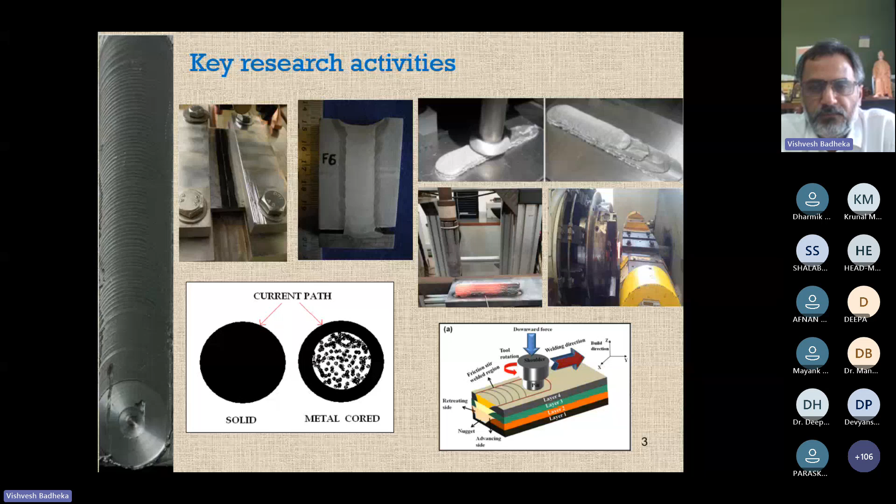This is a general slide which talks about some of the key ongoing research activities of our group. As far as today's presentation is concerned, this content has been planned for one hour, for session 1, and there is some other content planned for another session.

The classification of welding processes, challenges of dissimilar metal joining, friction welding, friction stir welding technology - wherein you have two different parts: welding and processing. Today's focus is on welding; the second session focuses on processing. I will be talking mainly about friction stir welding for dissimilar metals and materials, and friction stir welding variants.

Under the variants, assisted FSW, twin stir FSW, bobbin tool FSW, dual rotation technique, then another important process called friction stir spot welding, refill friction stir spot welding, pinless, double-sided, and finally friction stir scribe welding and stationary shoulder FSW. The whole focus in this first module is on the welding side.

So to begin with, I would like to start with the classification of welding processes. The classification includes solid state welding processes and fusion welding processes. When you say fusion welding process, there is a typical metallurgical phenomenon which happens, similar to the casting operation - melting and solidification.

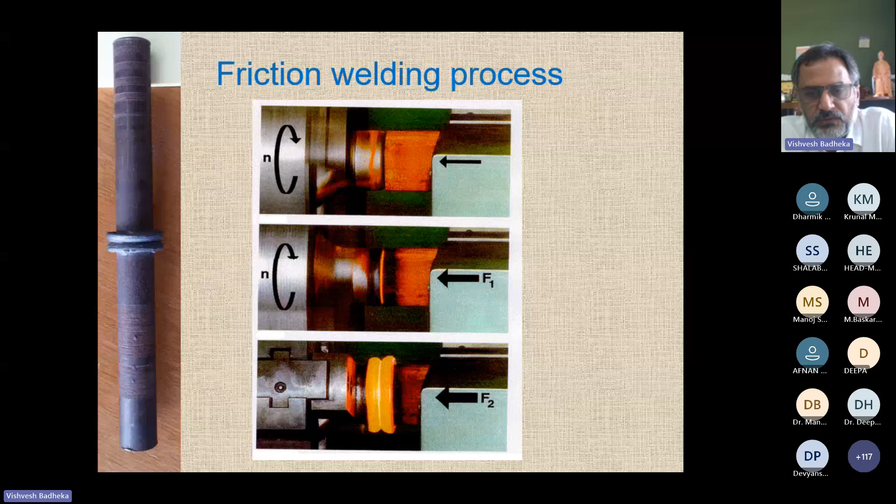So I have a small video clip here, which may help you understand. Now you see, this is the process. Can you please confirm whether the video is running properly? Yes sir, yes sir, yes sir. Okay fine.

Now you see, there is a video of rotary friction welding going on here, and this is what the friction welding process looks like. You can see the ring formation, and there are many combinations. As mentioned, one component has to be rotating and circular. You can also go for dissimilar geometry - you see the material is the same, but the geometries are different. The conventional one, with circular geometry, you can do easily on a lathe machine. This is friction welding.

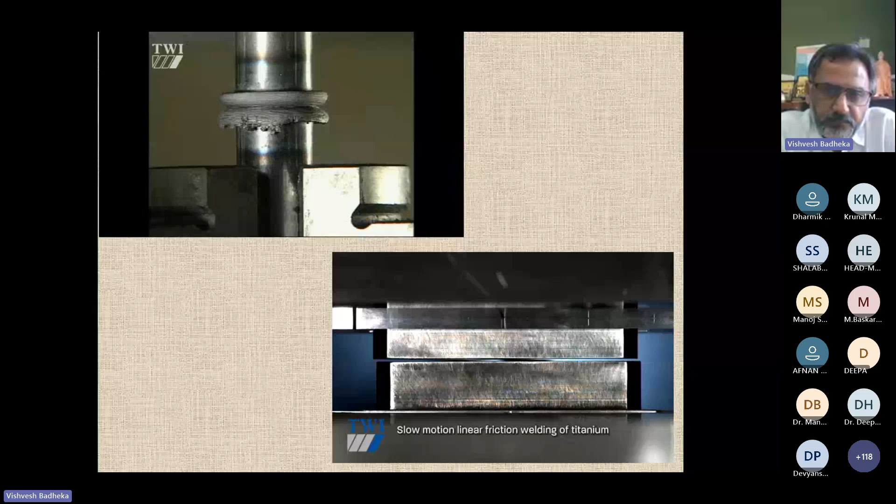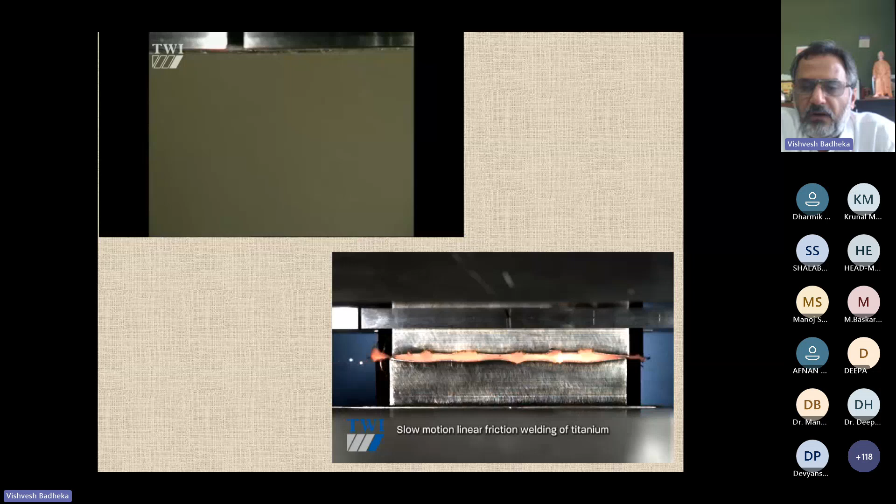So now here also, there is another possibility. You see there is a linear motion going on between the two interfaces. This linear motion may help develop red spots at certain intervals, and you can reduce the frequency further. These interfaces are rubbing against each other with a certain downward force. With the passage of time, these red spots get bigger and bigger, and eventually the complete interface becomes red hot. Now you see, this is how slow motion linear friction welding happens. So there are researchers working in this particular domain also - linear friction welding.

So rotary friction welding and linear friction welding - as I mentioned, friction welding is the mother process from where the other processes were invented. This is background, because our intention is to talk more about welding. Now, our actual presentation starts from here.

Now you see, if you look at friction stir welding technology, it has been divided into two parts: a welding part and a processing part. Our first session focuses more on the welding technology, friction stir welding technology, followed by the processing part. One of the speakers has already given a very detailed session on friction stir welding, so I'm not going to repeat that. Based on that, we are going to build on what other variants exist in friction stir welding technology, and in the second session our focus will be on the processing side.

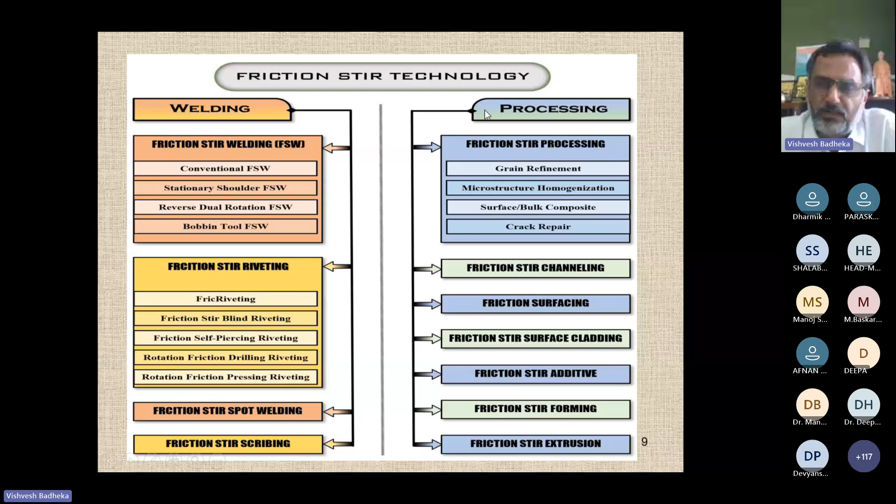So the main heart of friction stir welding lies with the tool. The friction stir welding tool is non-consumable, and there are two major elements: one is the pin and another is the shoulder. The pin is responsible mainly for material flow, while the shoulder is responsible for generating the heat. The shoulder generates around 80% of the heat, while the pin generates around 20%, because the pin's main function is to mix the material at the interface.

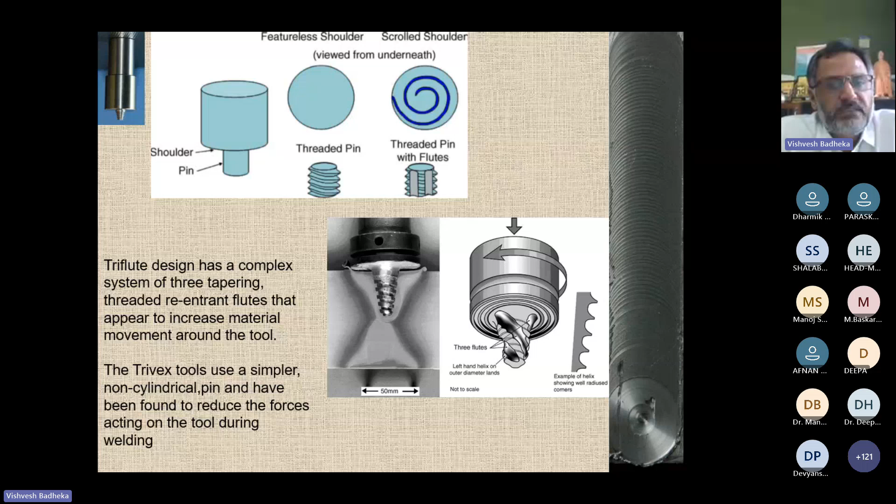His name is Dr. Wayne Thomas. He is the one working with TWI. TWI is the Welding Institute, located in the UK. I had the opportunity to attend the 11th FSW conference in Cambridge, where I had the chance to interact with Mr. Wayne Thomas, the one who invented friction stir welding technology.

Now, to begin with, our focus is on friction stir welding of dissimilar metals and materials. To start with, the first part of friction stir welding is dissimilar metal joining. When you say dissimilar metal or material joining, you are already familiar with the conventional parameters important in friction stir welding and processing.

RPM is important, welding speed is important, tool tilt angle is important, downward force is important. At the same time, there are two other parameters which are very important when you talk about friction stir welding of dissimilar metals - one of which is called the positioning of the material.

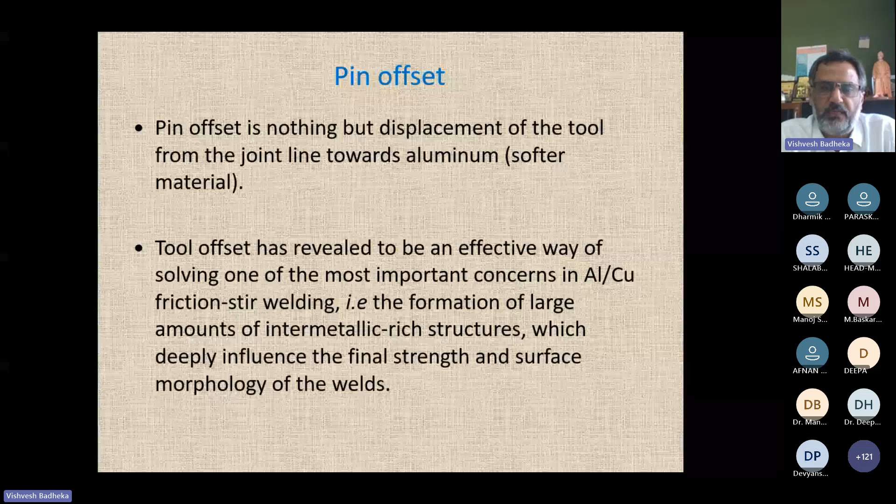It's very simple mathematics. Say for example my pin diameter is 6 millimeters, so half of the pin diameter is 3 millimeters. My maximum offset cannot be more than 3 millimeters. If I start with 3 millimeters, contact with the hard material will be minimum. Then from 3 millimeters, I can move to 2.5, then 2, then 1.5, 1 - that's how my contact with the hard material will go on.

That's how you can play with different offsets and optimize the strength and ductility of the joint. This is a very important parameter when you go for dissimilar metal joints in friction stir welding.

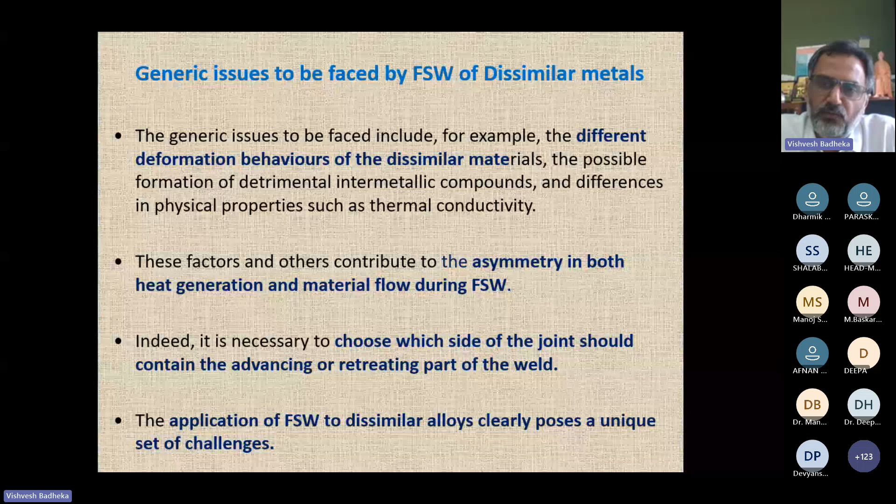So what are the general issues faced by friction stir welding of dissimilar metals? I already mentioned the challenges when you go for dissimilar metals through fusion welding, so there are challenges here also. What are those challenges? You have different materials with different mechanical properties, different thermal behavior, different heat generation and material flow. Which material will go on advancing side, which material will go on retreating side, how you will optimize the tool pin offset - these are the set of challenges when you go for friction stir welding of dissimilar metals. Hope this concept is clear to all of you.

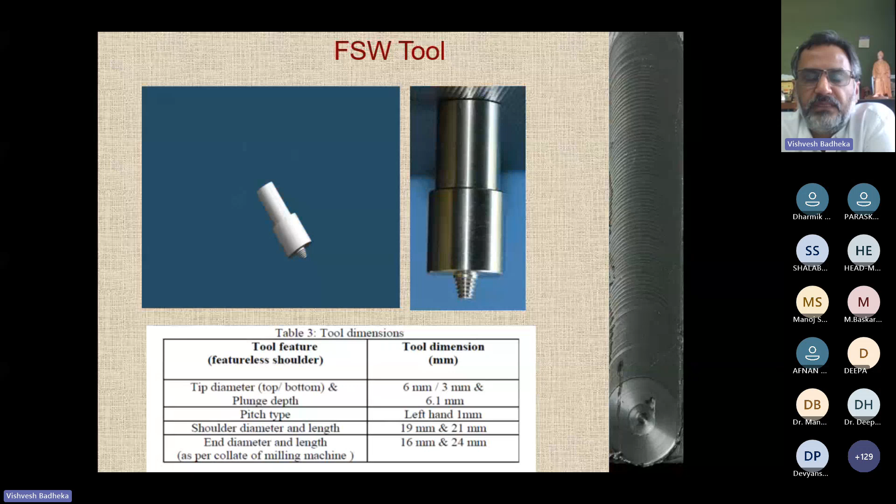So just to mention here, for any friction stir welding application, you require a tool. As I mentioned, the tool is the heart of the friction stir welding process. It is a non-consumable tool and it follows certain design criteria - the length, the diameter, the thread, the shoulder diameter, and the holding part. So it follows certain dimensional criteria.

We worked with ISRO on a RESPOND project for friction stir welding technology development for 1 millimeter, 3 millimeter, 6 millimeter, and 12 millimeter. So we developed various tooling, various process windows, and then their mechanical and metallurgical properties. And we transferred this development to the Space Applications Centre.

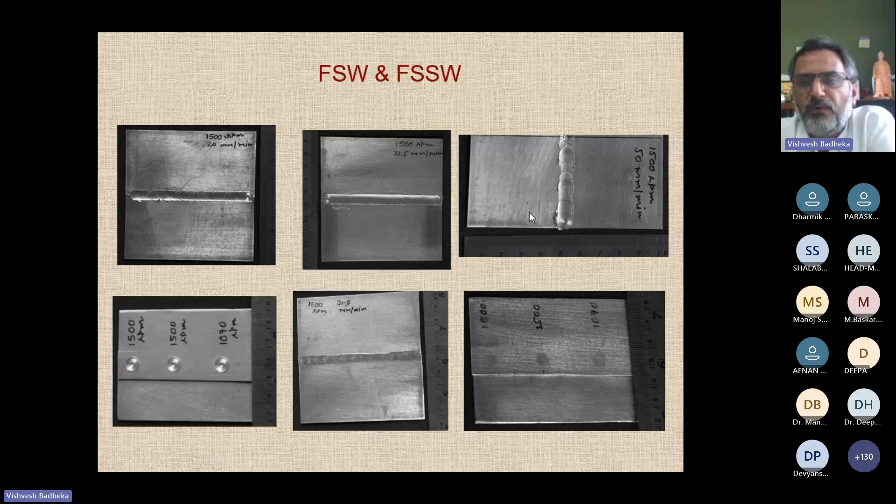You can see here some pictures of that. I'm not presenting everything, but just to show you that we are able to weld even 1 millimeter sheet. You can see this is a 1 millimeter sheet which has been welded on a vertical milling machine.

And you can do friction stir spot welding also. We will be discussing that part also subsequently.

So after giving you the background of friction stir welding for dissimilar metal, the next topic in this presentation is assisted friction stir welding. Now you may have a question why there is a need for having an assisted heating in friction stir welding. So before I explain, I would like to explain this process first.

So let us understand that you are doing a friction stir welding, and ahead of the friction stir welding there is a laser beam. Now assisted heating can be done with any variety of heat source. You can use even arc also, I mean gas tungsten arc welding torch. You can use even plasma also because they are non-consumable, I mean they have a non-consumable electrode. At the same time, you can use TIG, plasma, laser, or even oxy-fuel gas welding flame also.

So there are various heating elements. You can even go with induction heating also, ultrasonic assisted heating also. So there are various possibilities.

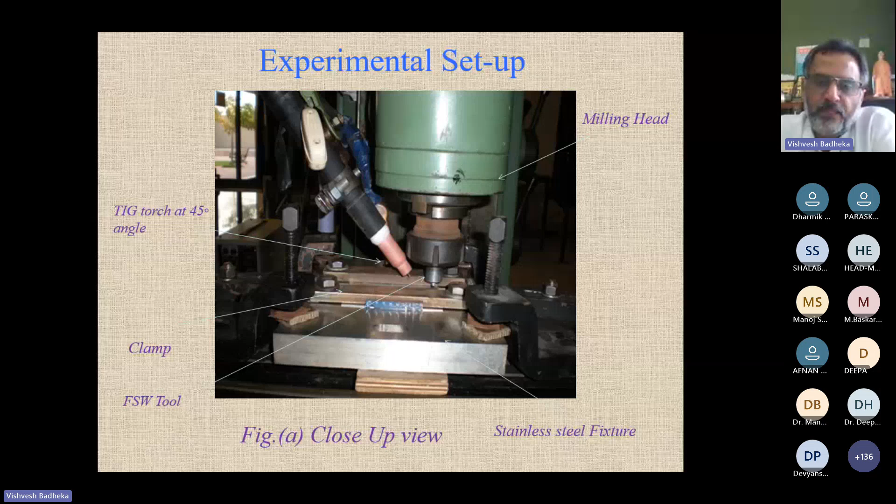This is the complete setup wherein you have a vertical milling machine clubbed with the gas tungsten arc welding torch, because shielding gas is also required. Experiments were performed with assisted heating mode using GTAW, because tungsten is a non-consumable electrode and the arc does not interfere with the FSW process.

So these are in-house results. Even if you don't apply assisted heating for high temperature material, applying assisted heating mode in soft material will still benefit you in terms of higher welding speed.

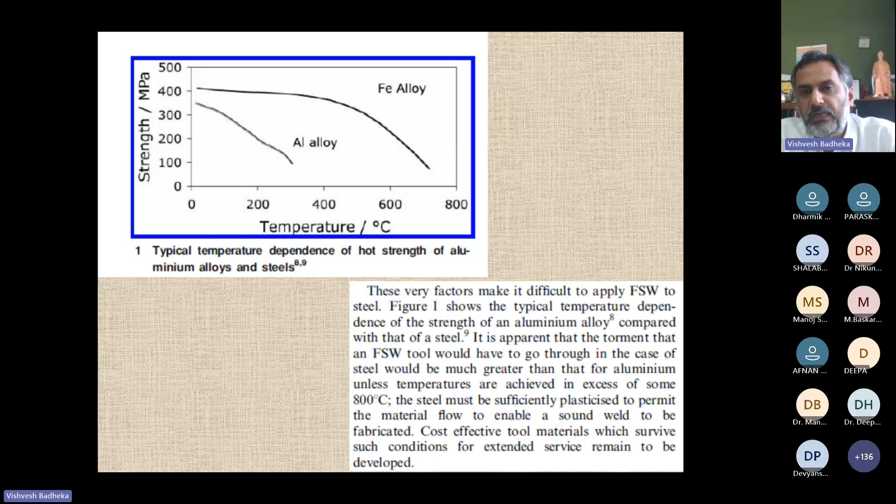So that was about assisted heating mode in friction stir welding. Heating plays a very, very important role, and you have to understand this particular slide very clearly. This gives you more clarity on why friction stir welding of other materials is challenging.

Moving further into another variant of friction stir welding, called twin stir friction stir welding. This twin stir is similar to how in arc welding we use two different arcs, a tandem kind of arrangement, with two arcs, one following the other or side by side, for different joint configurations.

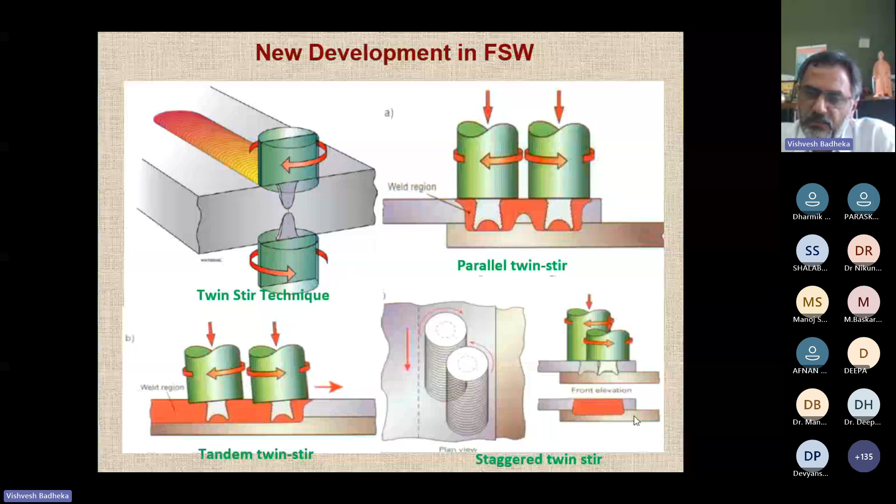A lot of interest has been there in parallel twin stir technology also. When you look at research articles, you realize limited articles are available in the area of twin stir technique. You can see the cross section wherein earlier you were getting an unfused area, but now with this staggered one, that is avoided. So these are the few twin stir technologies.

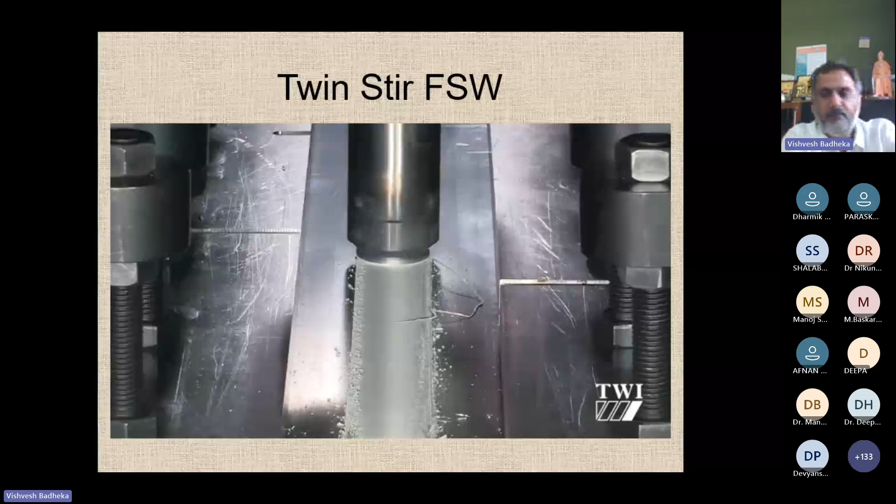Here is a twin stir technology clip. You can see two tools, one at the top, another at the bottom. As I mentioned, in twin stir there are many possibilities, and this is one of them. This is the back side, from the bottom side, because you have two tools, one at the top and one at the bottom. This is the bottom side, and this is the top side.

This is called twin stir, used when you want to go with higher section thickness, or when you want to weld a wider area. This is one type of twin stir. Going back, what you saw in the video is this. Similarly, you can have parallel twin stir, staggered, and tandem as well. With one spindle, you can rotate two tools. You have one spindle, and with that spindle you have one conventional tool which, through a gear attachment, is connected to another tool. So one spindle helps rotate two tools.

Going further, there is another possibility in friction stir welding called bobbin tool friction stir welding. In conventional friction stir welding, you are all familiar now, you have one pin and one shoulder. But here you have two shoulders. You can see here, one pin and one shoulder normally, but here you have two shoulders. Now, what is the benefit of the second shoulder?

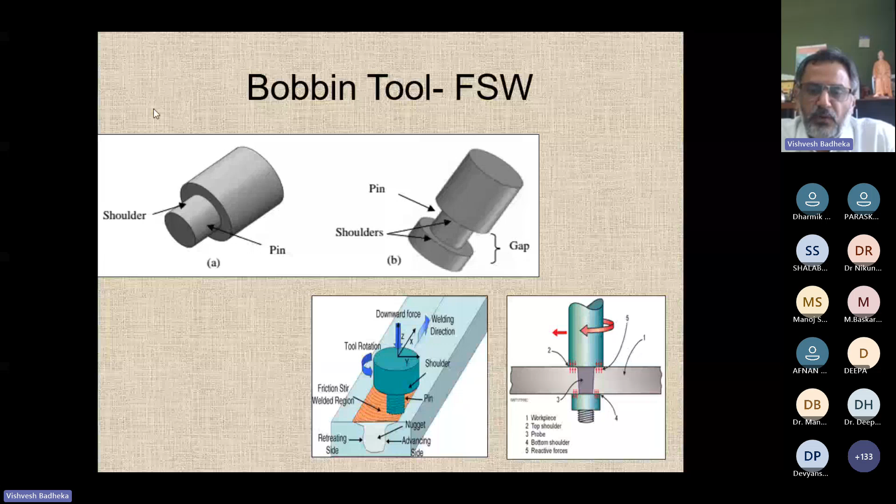So here also, similarly, if your plate thickness is 6 millimeter, the pin length will be 5.8 or 5.9, so that sufficient friction is generated between the surfaces, and then you're able to weld. This solves the problem of the backing requirement.

That's how it is called bobbin tool friction stir welding. Your fixture is also different. This is your conventional fixture for friction stir welding, and this is your bobbin tool fixture, wherein half of the plate will be on this side, another half from this side, and the tool will penetrate from this area. Because the tool has a second shoulder, it cannot penetrate from the top side, it has to penetrate from the side.

So you can see one more picture here. This is how conventional FSW works, and this is how bobbin tool friction stir welding works. It will penetrate from the side. You see the second shoulder here. Now the second shoulder is the one acting as a backing plate.

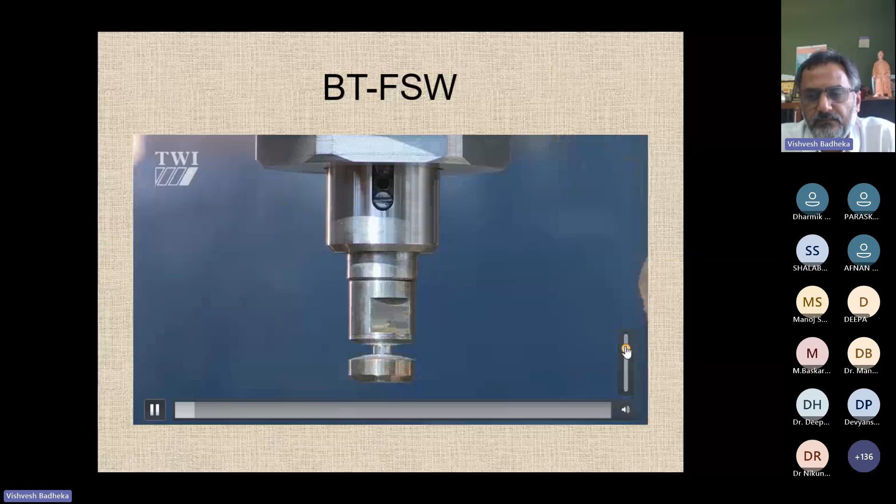Now here also I have a small clip which may help you understand bobbin tool welding easily. This is called floating. Floating means it will adjust during the process. You can see here there is a curvature surface, right? Since it is adjustable, it is called so. There are two types of bobbin tool: fixed one and floating one. This is the floating one, so it will adjust during the process.

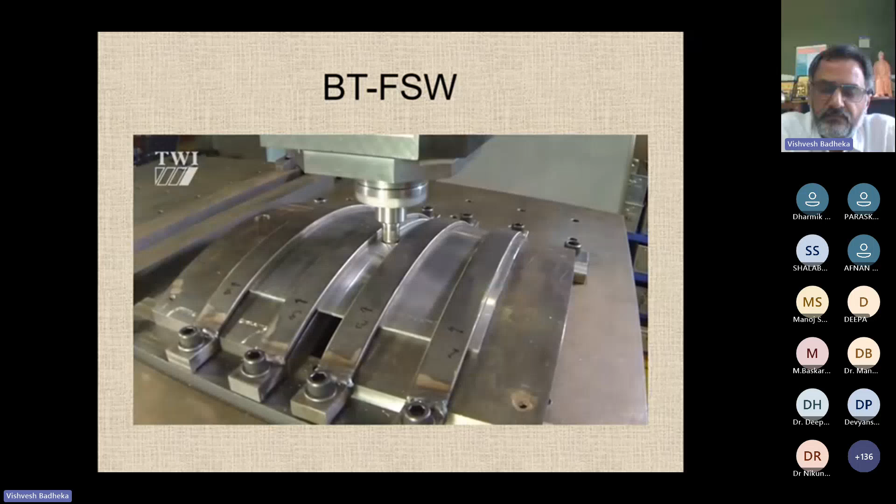Now you see this bobbin tool, the second shoulder, it is penetrating from the side, not from the top. So once it penetrates, in normal FSW you get a keyhole at the end, but here you get a little bit of a slot. You see here, there is a small slot formed, because you cannot exit the way you exit in FSW.

So this is called bobbin tool friction stir welding. Probably one more clip is there to make you more clear about the bobbin tool, on floating bobbin tool friction stir welding, you see here, that was on a curvature surface.

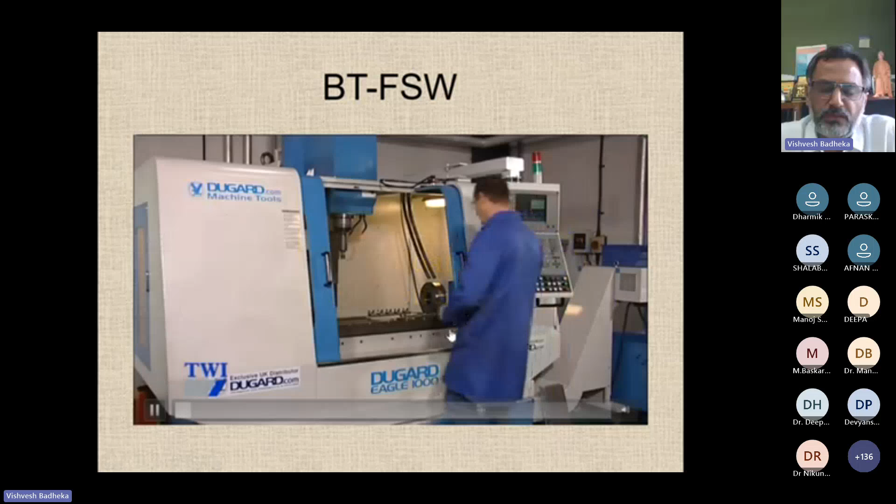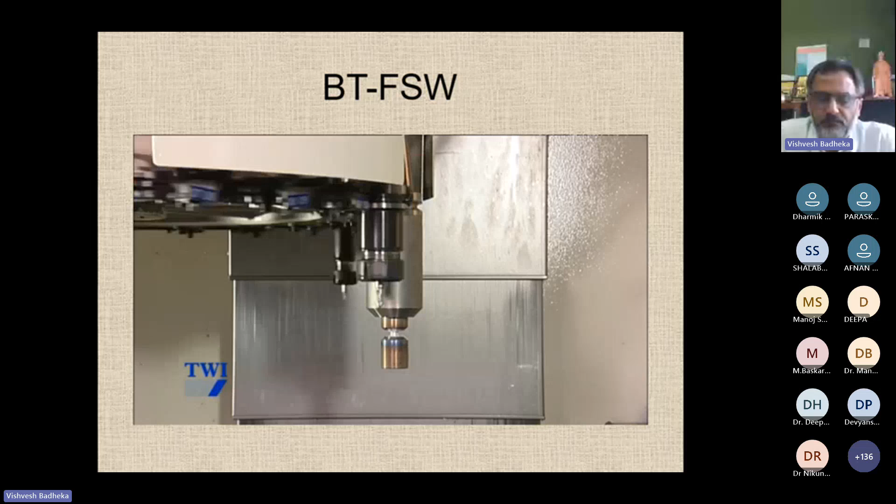Welding using zero downforce has been successfully demonstrated at TWI, simply with a traditional milling machine. The technique uses a floating bobbin-shaped tool. Successful demonstrations have shown that FSW can be performed using traditional, unmodified machine tools. A milling machine like this is all you need. The technique is ideal for joining low-temperature softening materials such as aluminium. Here, grade 6082 aluminium is being joined. The bobbin tool penetrates the joint line either directly or, as in this case, from a milled recess in the material's edge.

The process lends itself to joining closed sections, where conventional use of a well-supported backing bar is either difficult or impossible. Since, by definition, the bobbin creates a full penetration weld, the potential for creating kissing bonds, usually associated with lack of tool penetration, is eliminated. The process uses a one-piece tool, unlike some FSW variants, which require complex multi-piece tooling. As the machine bed is traversed, the material passes between the shoulders of the bobbin. So the process involves zero vertical force, unlike earlier adaptations of the friction stir welding process. No backing bar is required because the bottom shoulder supports the underside of the weld.

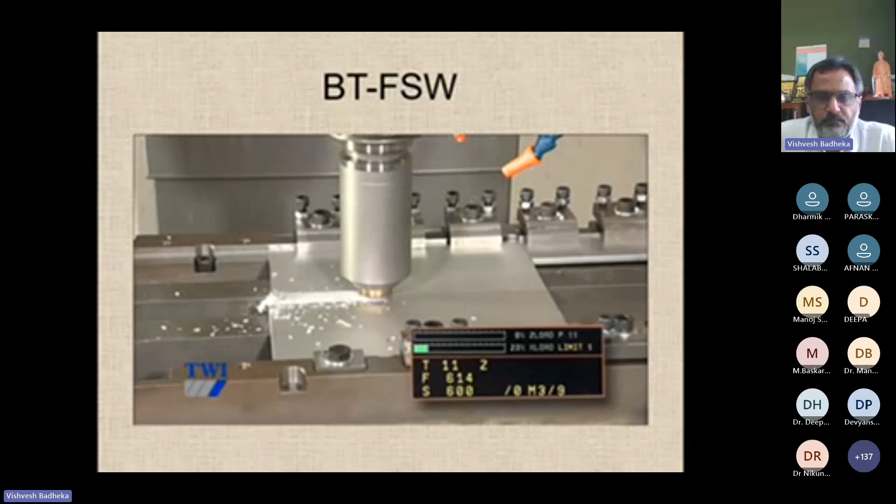Since the bobbin tool is free to move up and down throughout the welding operation, it naturally takes up a vertical position where the top and bottom shoulder forces are equal. This feature also compensates for any misalignment between the tool and the material. Laboratory trials have shown that the bobbin variant of the FSW process creates very little distortion. This is because the rotating tool creates a symmetrical heat input throughout the weld section.

So this is, well, about learning more about bobbin tool welding. That's how, with the help of the additional shoulder, it helps support the backing requirement, and you can make the process suitable for many other applications.

So this is the cross section which you can see, for bobbin tool friction stir welding. You can see the onion ring pattern, right, which is there, even here also. This is under the pin part and the shoulder part region, the thermomechanically affected zone. Then you have the advancing side, retreating side, those things.

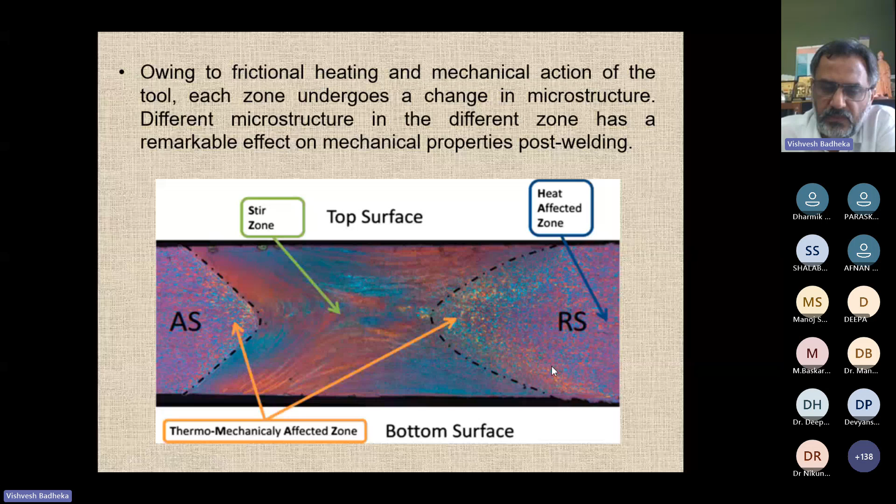Fine. Another important technique is called dual rotation. Dual rotation is another way, meaning you have a pin and shoulder which are independent variants in friction stir welding. It's called dual rotation. The dual rotation means the pin and shoulder are independent to rotate; they can rotate in the same direction also.

They can rotate in opposite directions also, right? So that's how it helps reduce the heat input, because the shoulder generates a lot of heat - 80% of the heat is generated through the shoulder. So if you wish to reduce the shoulder movement, that's how the dual rotation technique helps you control heat input. They can rotate in the same direction, in the opposite direction, and with different speeds also.

Now, moving further, there is another variant of friction stir welding called friction stir spot welding. The way we talked about resistance spot welding, arc spot welding, TIG spot, MIG spot - there are many riveted joints. Similarly here, compared to conventional welding processes, through the same friction stir welding machine, you can do friction stir spot welding also. We'll first talk about conventional friction stir spot welding, followed by a variant called refill friction stir spot welding, which can be pinless and double-sided also.

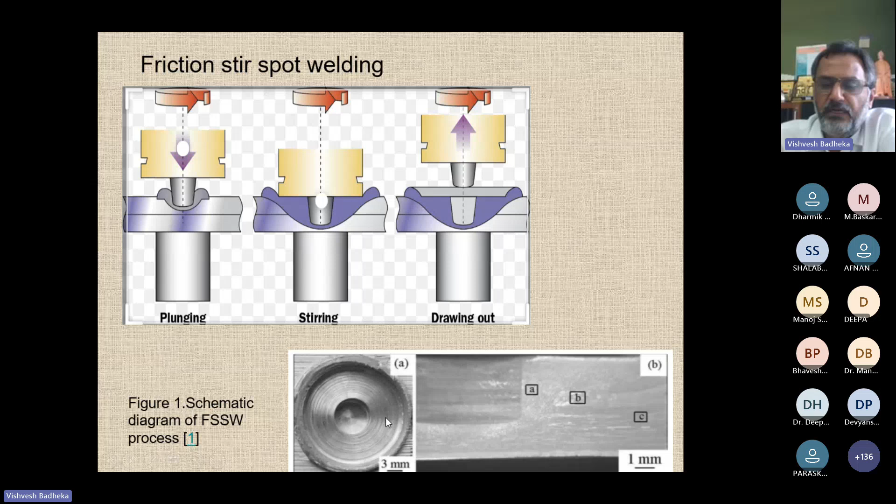So this is a color picture of friction stir spot welding, which you've seen earlier as a line diagram. There's a tool and two sheets, and the tool has to penetrate beyond the interface. When you eject it, you're left with this type of hole, called the exit hole. A similar hole occurs even in normal friction stir welding. Now, if you compare the earlier picture with the exit hole cavity to this other picture - can you see any cavity here? No, there is no cavity.

It is filled. So how can you achieve that? Without adding any filler metal - with the addition of the material itself - you can fill the cavity. So this new process is called refill friction stir spot welding.

So initially, what happens? The shoulder and the pin both move towards the workpiece, which is in lap configuration. Then in the second stage, the shoulder moves down while the pin goes up.

You can see the motion is opposite, right? The clamp remains in the same situation. The whole intention of the clamp is to hold the sheets, so they will remain the same.

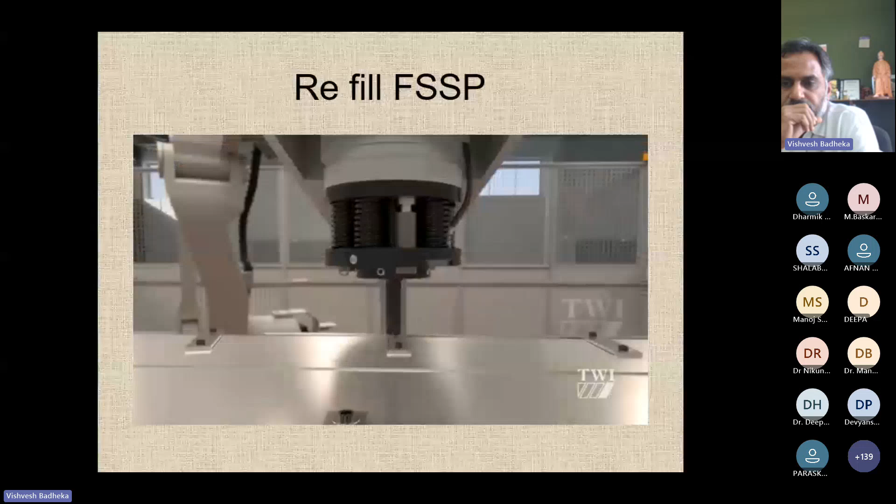This is very, very important now. Now you see the shoulders are going down. Now you see, first clamp.

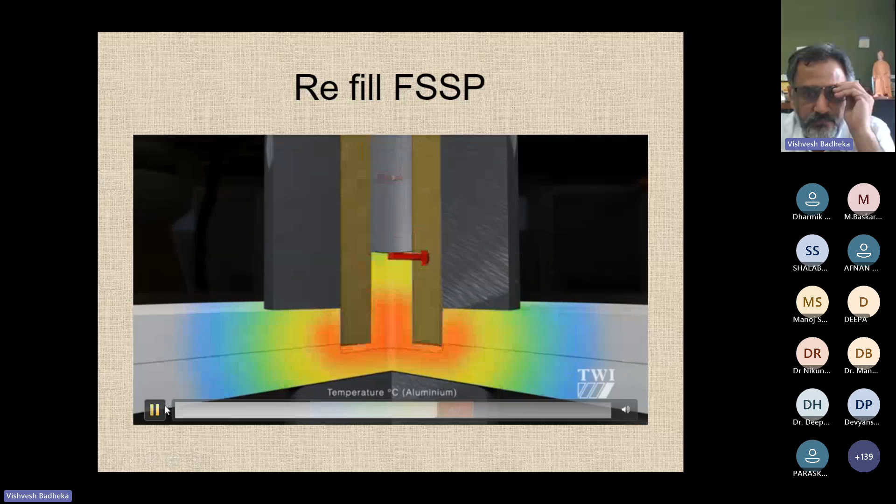So the most important element is probably this. Let me show you. Now you see here, this is what you can see. This gray one, the bigger one, is nothing but the clamp. The central one is the probe or pin, you can say, and this is the shoulder. So in this case, it is shoulder driven deformation. The shoulders are going down, and since the shoulders are going down, you see the material is deforming. Temperature is rising and material is deforming, so this deformed material is going up. Then the motion reverses: now the pin goes down and the shoulder goes up. You can see the temperature regimes also, close to 427 degrees centigrade. This is the interface of the two sheets, which you see in stage 1, and this is all at the same level, right?

So that's all. Moving further, the purpose here is the same. Why have they developed pinless friction stir spot welding? Because they don't want the hole which forms at the end. That hole is because of the pin. So if you remove the pin, is it possible to weld? Yes, it is possible. So they remove the pin and come up with a process called pinless friction stir spot welding.

Only the shoulder is there to deform the material, and you can see there is large deformation, very high, because you are deforming with the shoulder instead of the pin. You can certainly avoid the exit hole, but the overall deformation is very large at the joint location. This is called pinless friction stir spot welding.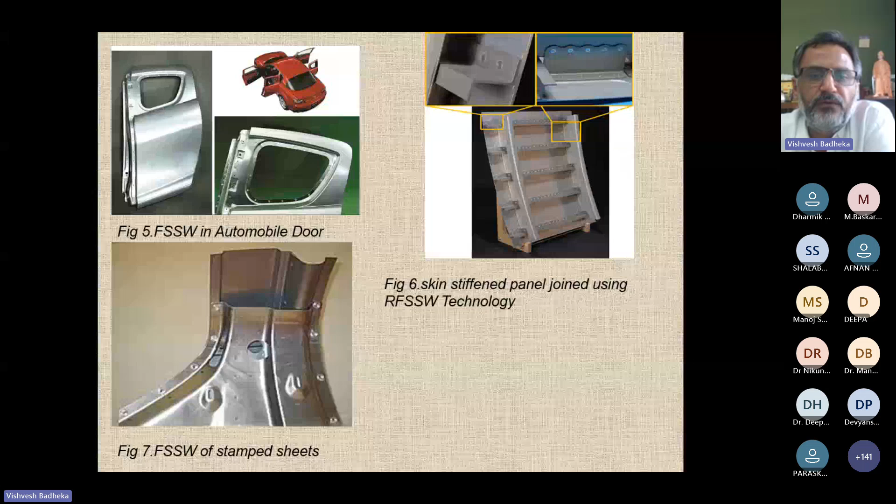As I mentioned, you can have various kinds of shoulders, especially when you are going with pinless. Please understand, when you go with pinless friction stir spot welding, it is essential that you should have proper material mixing. So how will you ensure that? If you go with a plain shoulder, you get a different kind of material mixing.

But if you have a shoulder with different types of features, you see the features are different, right? Scroll shoulder with different features. This will help promote the mixing at the interface, even if you don't have a pin. This is a conventional tool used in friction stir welding, but they are for steel application. This one you can see is pinless.

Hope you understood that in this pinless friction stir spot welding, the shoulder has an important role to play. It has to play the role for material mixing also, and it has to play the role for heat generation also.

So after discussing friction stir spot welding and its variants, the second last process is friction stir scribe welding. Another novel process, very limited work has been reported in this particular domain as well. Just to mention here, this process is suitable for lap configuration.

The way friction stir spot welding is for lap configuration, this is also for lap configuration. Lap means what? You can see this joint configuration, right?

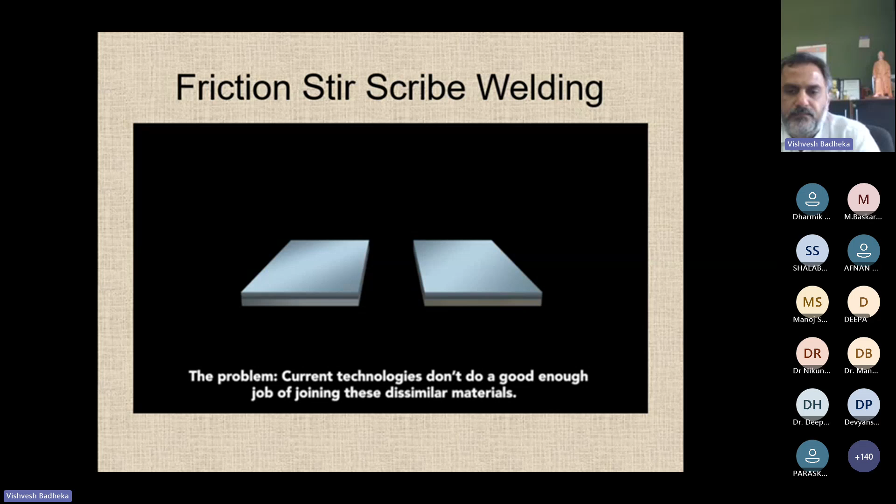See the scriber here. You can have a multiple scriber also - single scriber, double scriber, triple scriber. And create a very good joint.

Now we see the mechanism. Initially you require some kind of pilot hole, because otherwise the load will come on the scriber and the scriber may get damaged.

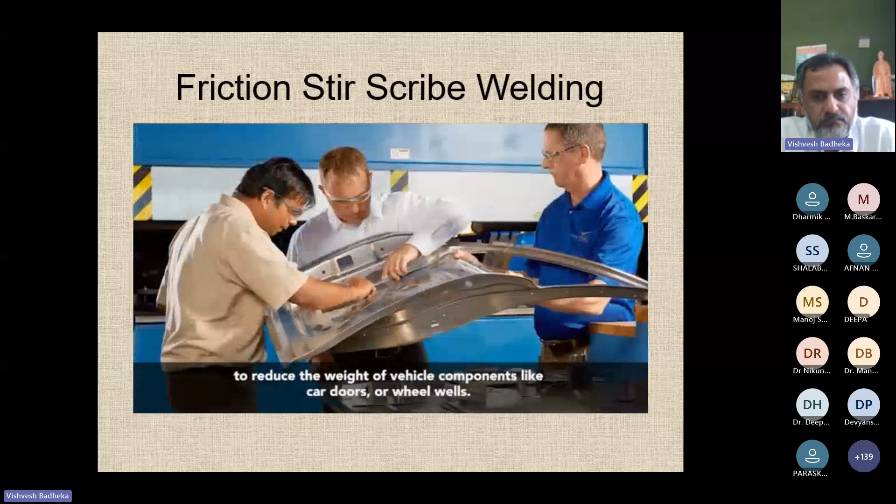So that is there. Before I close this session, I have a last process to explain to you - that is called stationary shoulder, another process under the category of friction stir welding, which is called stationary shoulder friction stir welding. As I mentioned, you are not rotating.

We talked about dual rotation. Dual rotation means both are rotating, right? They can rotate in the same direction, or in opposite directions, and you can control the RPM of pin and shoulder independently also.

So here stationary shoulder means what? You are rotating only the pin while your shoulder is stationary. There are few applications wherein you want to reduce the heat input drastically.

Say for example, for storage of electronics housing in magnesium based material, especially for aerospace applications, satellite applications - you don't want to put too much heat of friction stir welding to those electronics components. So that time you can go with stationary shoulder friction stir welding, and there are many other applications also. The whole process is a very novel process.

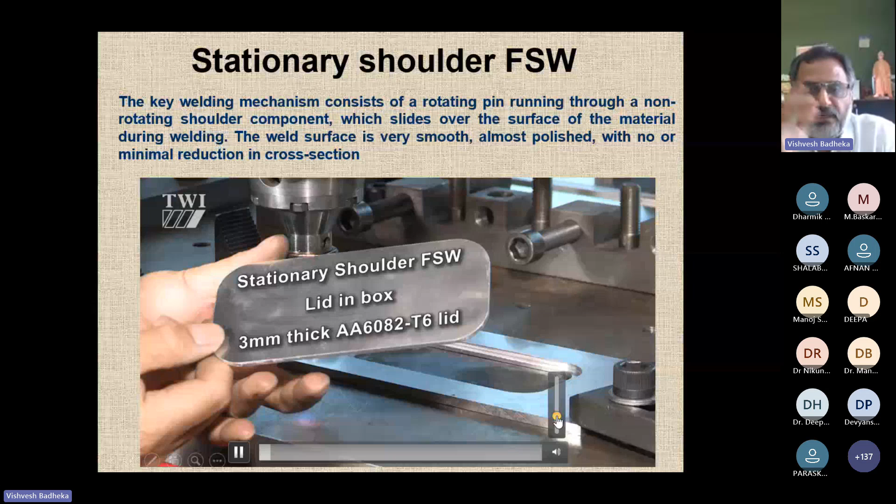Let me show you a small clip on this. Stationary shoulder FSW - that means the shoulder is not going to rotate. It will just be there on the surface to provide you the downward force, and you will get a very smooth, almost polished surface.

You can see the heavy duty robotic system. Observe this clip carefully so that you can understand the shoulder is not rotating, only the pin is rotating. Now you see the pin has penetrated.

You might have seen initially it showed an electronics housing or cover kind of application. Now you see it has penetrated, and then it is following the path.

You see the shoulder is not rotating - shoulder is there to give you the downward force. And the kind of finish which you are getting is excellent, almost a polished surface kind of thing, with minimum cross section.

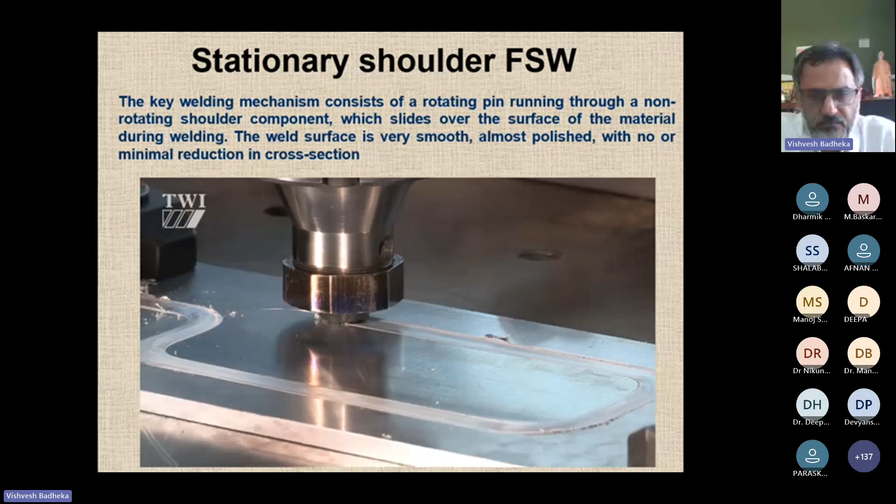So this process - as I mentioned, after the development of friction stir welding, the mother process is friction welding, and from there friction stir welding has been developed. From friction stir welding, there are many variants. We started with friction stir welding for dissimilar metal combinations, dissimilar material combinations.

We talked about the assisted heating part. We also talked about twin stir technology. We talked about friction stir spot welding and its variants, friction stir scribe welding, and lastly, friction stir stationary shoulder FSW. With this, I have come to an end of my talk.

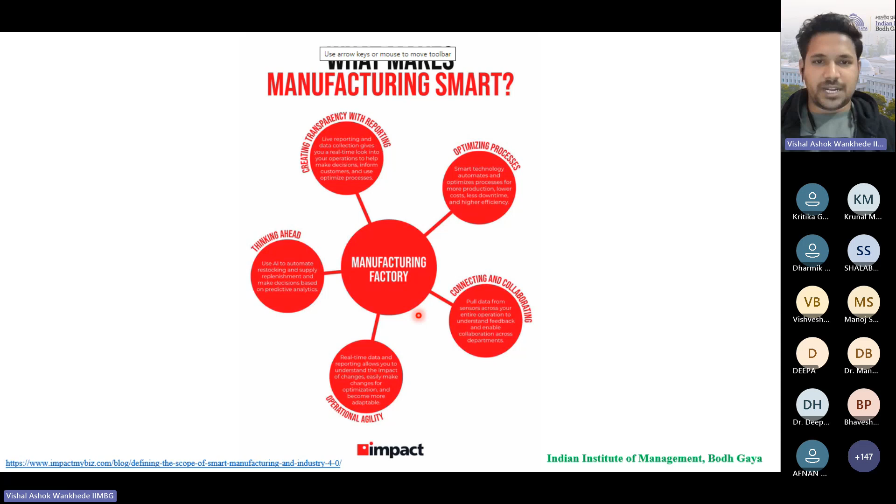Or we can say the actual manufacturing industry is moving towards smartness. So what is the foundation for this? We call it an industrial revolution. Whenever we realize some changes in industries or in our surroundings, we call it a revolution. So when do we say there are changes, or in which sector we observe changes in industries, and then say yes, there's an industrial revolution?

Whenever there are major changes in, first, industry and services - the way we make, buy, or sell things. Second, transportation - the way we travel. And society - the way we live. So here we are now observing these changes.

We have completely transformed. We are basically living into Industry 4.0. We have seen how the entire service of a particular product is being changed, and we are experiencing it - how people are now selling it, how people are buying it, what customization options are available with us. Similarly, we have also seen changes in transportation mode and society. We are fully surrounded by digitalization nowadays, and we can see it has become a part of our life.

So it is usually new ways of thinking and doing, and new technologies, that cause the changes to happen. This is basically the industrial revolution - when we see changes in these three arenas.

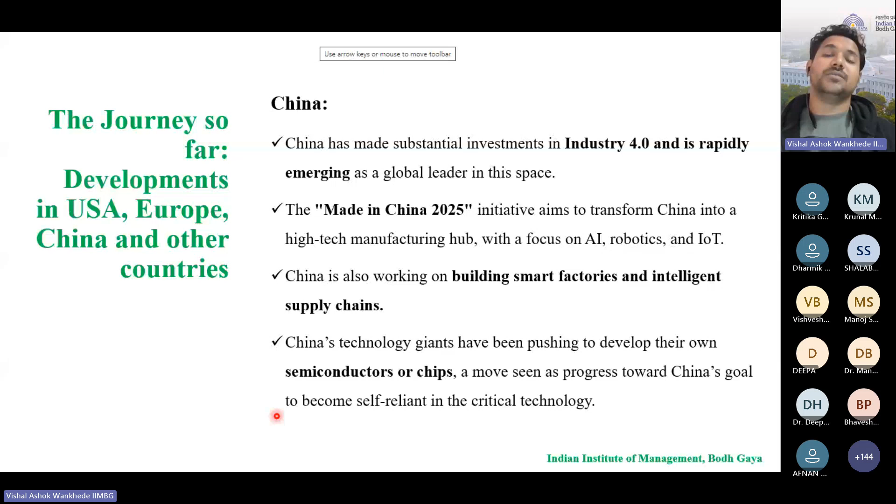China's technology giants have also tried to develop their own semiconductors or chips, so that they can be self-reliant in critical technology. So now they are able to move ahead because of adoption of Industry 4.0, which China is also now focusing on.

Similarly, Germany, as you might be knowing, Industry 4.0 is basically the evolution of it. The word itself came from Germany, because Germany is the largest manufacturing hub, where we say all advanced manufacturing you will observe in Germany itself. So Industry 4.0 being their own concept, they are committed to advanced manufacturing.

Where SMEs are concerned, if I talk about Indian SMEs, there's still research challenges. People are still working on how Industry 4.0 can be adopted in Indian SMEs, where the research is still going on, which I'll talk about at the last.

But in Germany, SMEs are playing a significant role in developing their economy, and these SMEs have already adopted Industry 4.0 technologies to stay competitive and innovative. So Germany is the one which is particular for manufacturing.

Similarly, France is also coming up with their own initiative, Industry 4.0 for the Future. If you see the French campaign name, it means Industry 4.0 for the future. So they are also aiming to modernize the industrial sector, and they have formed clusters like the Paris-Saclay Cluster and the Toulouse-based Aerospace Valley, aiming to foster R&D in Industry 4.0 technology.

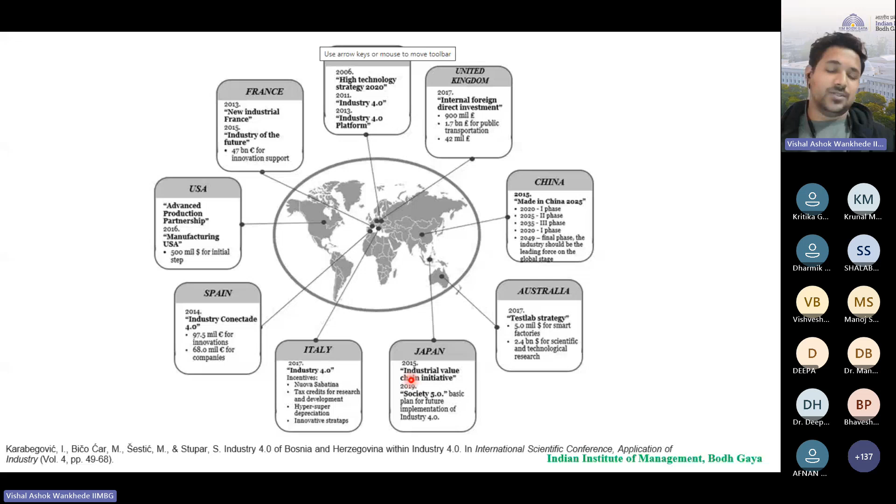So where people started with Industry 4.0, Japan started talking about quality 4.0. Japan is coming up with the concept of Society 5.0, and they have already developed a plan with respect to implementation of Industry 4.0, but not eliminating the societal part. This is one of the learnings from Japan that the world can take. They have recently started Society 5.0, where now people are talking about Industry 5.0 as well.

So this is some data which can motivate our country to understand what Industry 4.0 is in the global perspective. Similarly, as I said, industry policy funding initiatives also we should know, where I have also discussed regarding India.

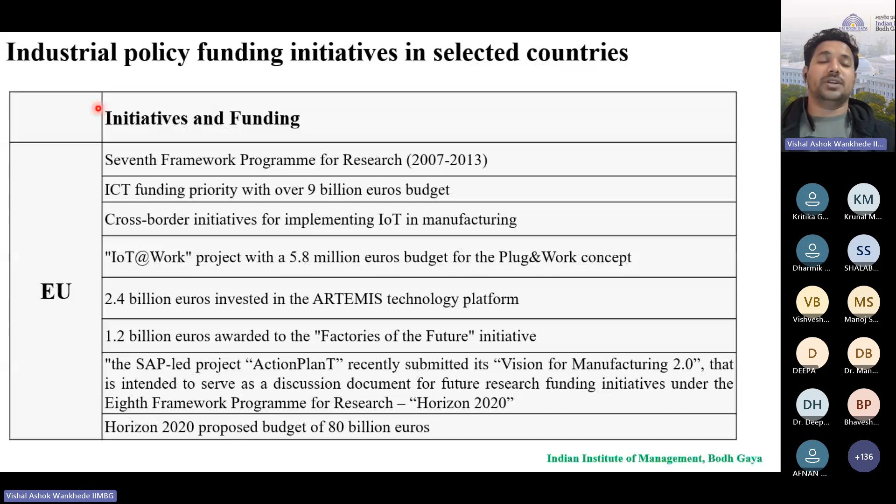Same if you see in machine tool sectors along with IT sectors or IoT development, China has its own policies. Similarly, the European Union now is coming up with ARTEMIS, which is Advanced Research and Technologies for Embedded Intelligent Systems, where they have invested almost 2.4 billion euros. And similarly, they have other initiatives and funding for Industry 4.0 to make it successful.

Coming to India, if you talk about our country, we have had a 5-year plan since 2012 to 17, which led to increase in public and private R&D investment. Similarly, the cyber physical system innovation project that we launched to conduct research into humanoid robotics. So the research aspect into robotics into manufacturing is going through these initiatives.

And this Bosch Center is there for research in CPS, which I'll discuss - how many centers India has which focus specifically on Industry 4.0. This was also established in 2011. So here we can see that as the Industry 4.0 concept came, we also started developing such initiatives for adoption of Industry 4.0.

Now, obviously we can't achieve this now, since we have seen that Industry 4.0 is important, how globally it is taking care, so India as well. So there is no doubt that we can't achieve smartness in manufacturing without embracing modern technologies. So what can we do? So what basically does smart manufacturing represent?

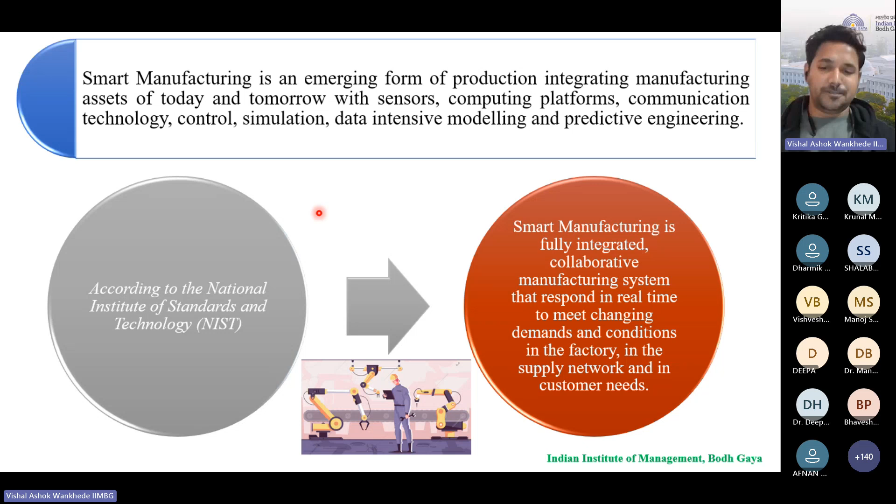Okay, so what modern technologies are required? As you might have seen, starting from autonomous robots, simulation, system integrations which is horizontal and vertical integration, industrial IoT, cyber security, cloud, additive manufacturing, augmented reality, and big data.

Now, if you talk about what technology is important at present, I would rather say that cybersecurity is the one which is the need of the hour to implement when industry is going for implementing any one of these technologies, because cybersecurity is the one - since we always say that data is the new oil, and the entire manufacturing industries or Industry 4.0 technologies are trying to focus on implementing each technology one by one.

No industries have actually implemented all the technologies, they may be implementing one or two technologies in parallel. But implementing all the technologies needs cybersecurity as a major concern, because we can see the kind of attacks this system has right now. So cloud cybersecurity is important for these modern technologies that make an entire manufacturing smart. This is one more slide where we can see applications based on each and every technology.

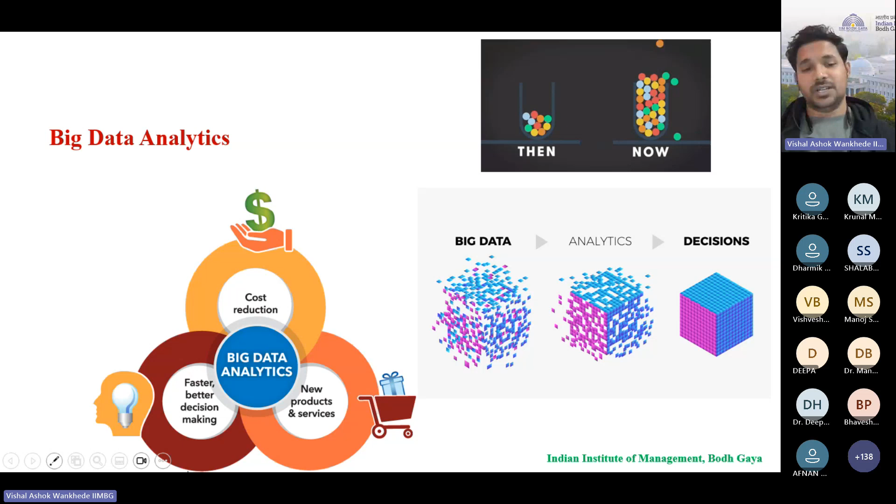Similarly, we have big data analytics. Whatever data is generated from manufacturing, previously there was data, people were using the process, but we were not recording it or able to capture it on a larger scale. Now, since a huge amount of data is generated through any operation, you can take decisions with respect to cost reduction, new products or services, or any decisions that can lead to faster analysis using big data analytics.

Then we have Internet of Things. There might be some confusion between what cyber physical system and Internet of Things does. Basically, Internet of Things is a subset of cyber physical system. When we talk about cyber physical system, we are connecting the entire industry with the cyberspace, whereas Internet of Things is where each and every device in industry is connected with the internet, and operations are monitored virtually to take better decisions. This Internet of Things is also one of the important technologies for real-time monitoring or automation purposes.

Additive manufacturing, you have already understood how it works, what the process is, and how it contributes or helps us realize what green manufacturing is. I won't talk much on this, but additive manufacturing, since this was the manufacturing that started with automation, now we are moving one step ahead to make this manufacturing a real-time automation process, because this is one of the processes which also drives a circular economy, which is also one of the objectives of Industry 4.0. So additive manufacturing is also one of the important technologies for Industry 4.0, which can help industries achieve green manufacturing.

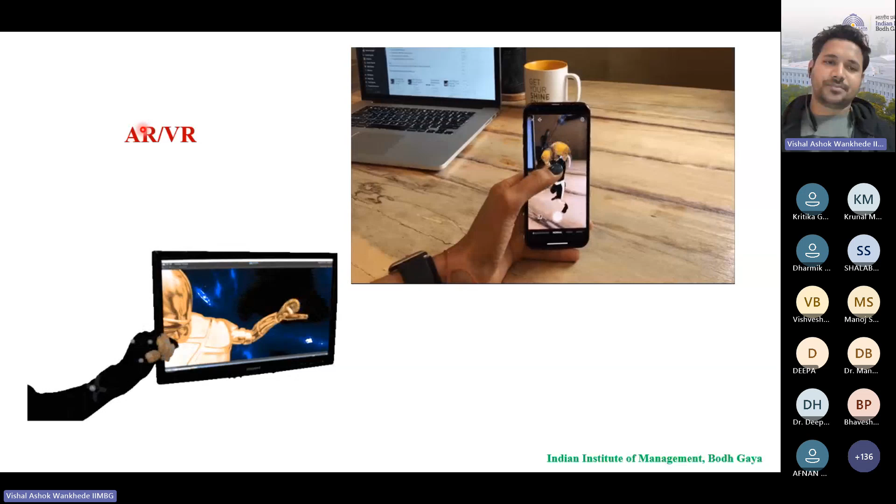AR, VR, that is augmented reality and virtual reality. Whenever we assign a fully immersive experience, we call it virtual reality. And augmented reality, as I said, uses another device, like you can see here. So this basically talks about the augmented reality part. In manufacturing, industries are using it for maintenance purposes.

Bosch has also implemented augmented reality for worker training as well as for maintenance of manufacturing machines. This is one of the technologies which can be used for embracing Industry 4.0.

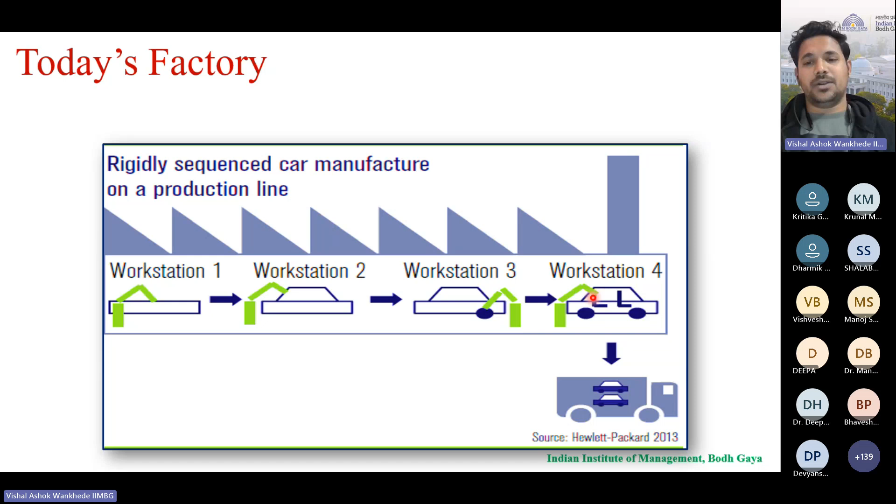Because however you set up the production line and assemble different parts, you can only work with whatever position or area is designated there to finally achieve the product. So individuality is not encouraged in today's factory, and as a result, it's not possible to incorporate an individual customer's request to include an element from another product — for example, fitting a Volkswagen with a Porsche seat. That's not possible with today's automotive manufacturing.

However, we are aiming to build a factory or manufacturing system that can be customized. Additive manufacturing is one example that addresses this, but we are still aiming for manufacturing that is decoupled, fully flexible, and highly integrated, where an individual customer's requirements can also be achieved.

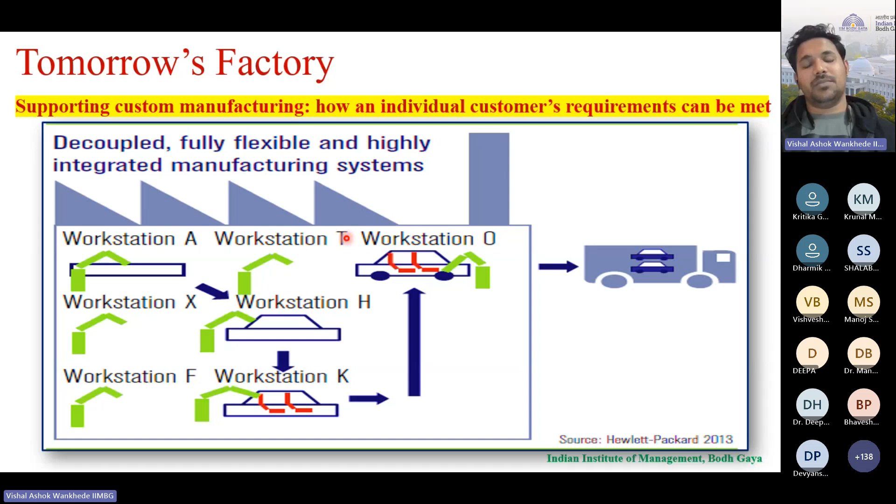This is one of the targets which we can achieve when we implement Industry 4.0 technologies in an assembly line. So what parameters or aspects are we looking for when we move from traditional industries to Industry 4.0 factories? The very first is we are now moving towards automation and robotics instead of manual labor intensive processes.

We are also looking for the control aspect, where previously traditional factories did centralized decision making, and we are moving towards decentralized. Basically, whatever data we have, based on that we want a decision system. Decentralized means wherever you are, you can control that particular activity or task.

Similarly, connectivity is also something we look for, where we talk about interoperability or interconnectivity through IoT and data sharing, and also batch sizes and maintenance, where we are now moving towards predictive maintenance with the help of sensors. As already said, we have limited customization opportunities because of the inflexibility associated with today's factory, but tomorrow we are looking for highly customizable products.

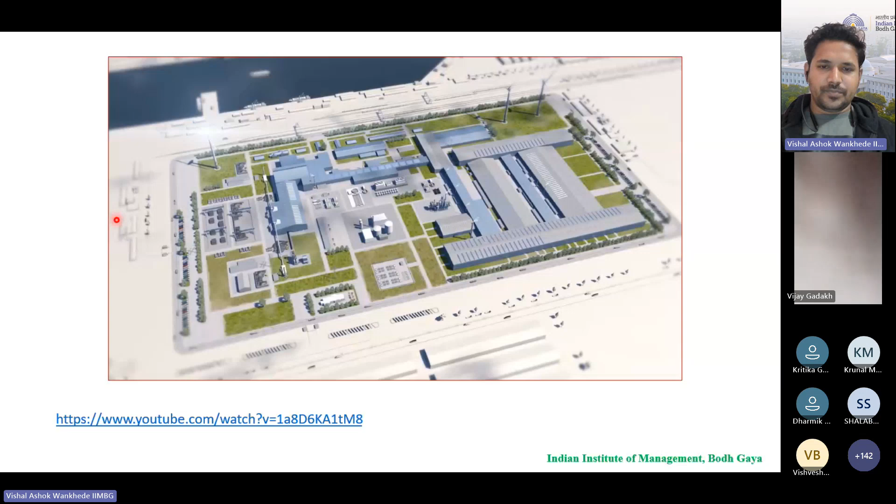So you can see this is the future plant. No human is involved in this. However, they can visualize each and everything on the screen, and they can also visualize all the operations remotely. The entire site is networked, and this network is not only local but also global.

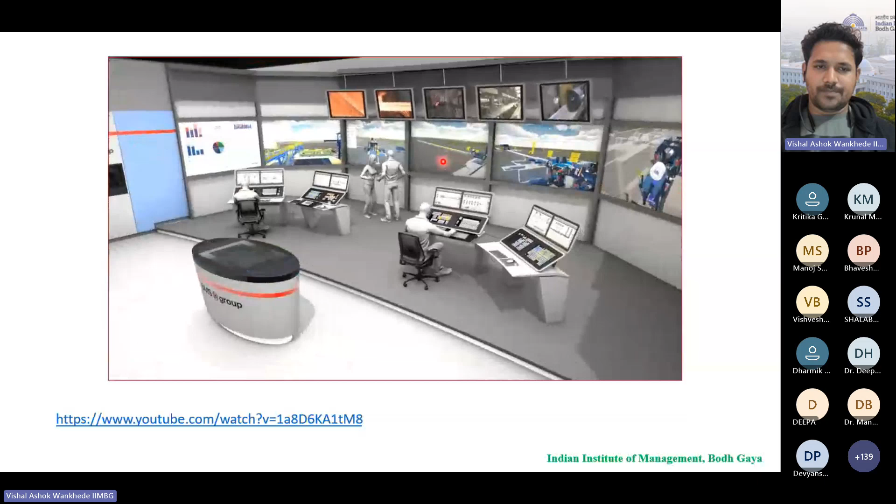So the similar nature which was local to the factory is the same globally available, so that's what remote manufacturing is.

So here we have seen how factories are expecting to change with the implementation of Industry 4.0. All manufacturing operations, basically towards the productivity point of view, wherein the production planning you take all the operations which is very close to the customer, that we are trying to optimize.

A similar example you can find from Adidas, who as we all know is a global sports brand and has been running its mass customization program, miAdidas, for several years. They are now coming up with a product which allows customers to personalize or customize their sports footwear to meet their performance or styling needs.

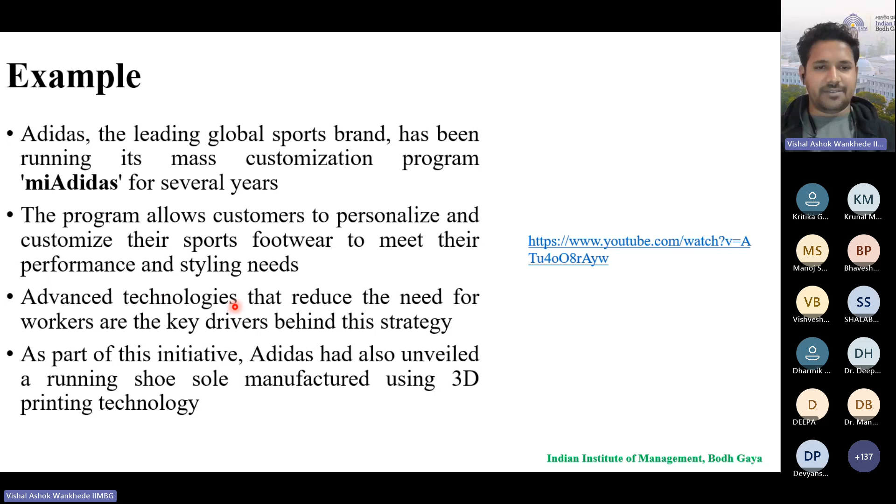Similarly, from a research point of view, as I already said, research is still going on for Industry 4.0, that too from a techno-managerial point of view. People are still talking about how Industry 4.0 can be implemented, what could be the implementation patterns, how manufacturing can adopt it, what technologies they should adopt, what kind of foundation technology they should have, and so on.

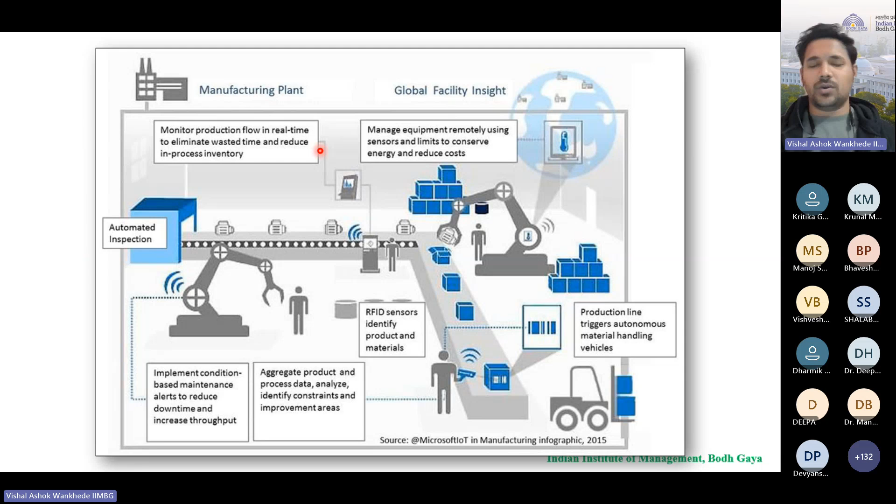Same, you can see - implement condition-based maintenance alerts. These are some of the functions we can make. Same - aggregate product data and process data analysis to identify constraints. RFID sensors can be introduced. Here, the production line will trigger it. So this entire operation, if it gets success locally, globally now people can manage it remotely using sensors and limits to conserve energy and reduce cost. This is how we can reduce cost along with achieving sustainability.

So one more video I have, which is for smart manufacturing. The timing is a little more, but I'll just introduce you to a few key points from this video.

Manufacturing is vital to the U.S. economy in general and maintaining our strong economic growth. As a manufacturing organization, we constantly face cost pressure on our products. There's also regulatory scrutiny to ensure that we maintain the quality of our products. We need to be able to communicate to our suppliers, communicate to our customers, exchange data back and forth. All that's going to be based on cloud technology.

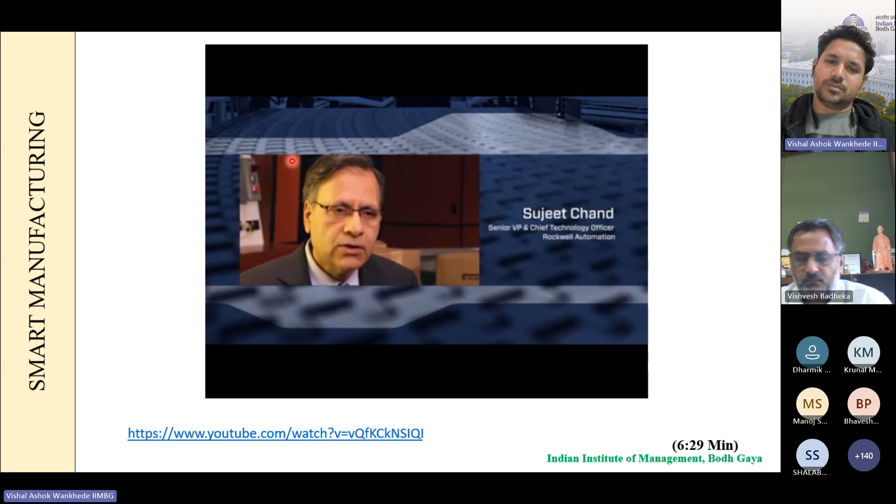Smart manufacturing allows manufacturing companies to optimize their production and supply networks through bringing together islands of information. Smart manufacturing, which is really about enabling that latest IT infrastructure to support manufacturing, is really vital, cost competitive on a global basis. I've been at Pfizer for 34 years, and this is one of the most important manufacturing technology breakthroughs that I've seen during that time.

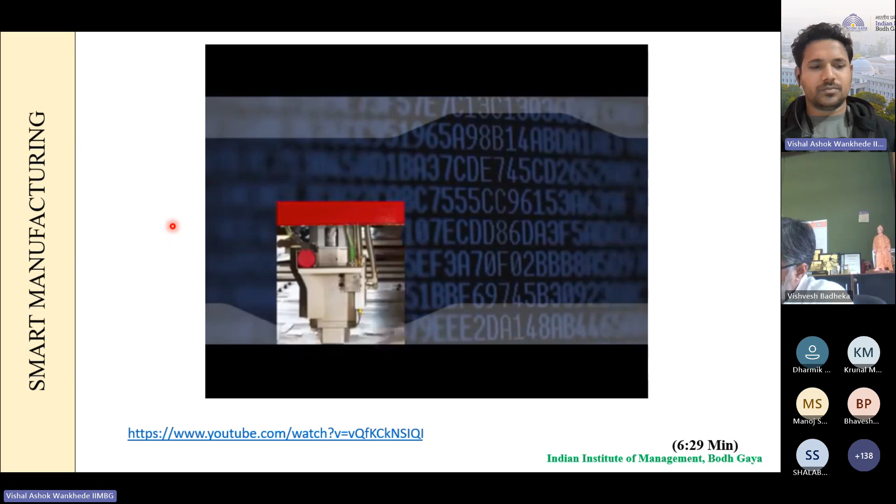Manufacturing stands on the brink of a new industrial revolution. While the last revolution was powered by engineering innovation, this one is driven by unprecedented access to data. These new revolutionary advances merge both physical and virtual worlds, opening doors to completely new areas of innovation, making manufacturing far more cost-effective, efficient, sustainable, and safe.

But smart manufacturing faces significant challenges too, requiring a new IT infrastructure that all U.S. manufacturers and suppliers can access and contribute to while maintaining their individual security and proprietary systems. The potential for smart manufacturing to drive new business opportunities and create new jobs is so compelling that leaders from many organizations are working together to make it a reality.

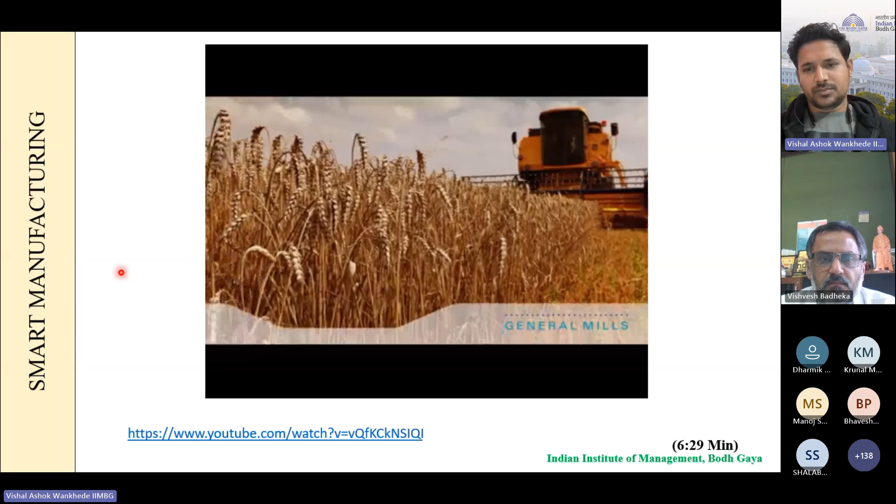At General Mills, we're looking for smart manufacturing to solve a number of problems. We have a project that today solves a supply chain issue from field to fork. It looks like it's going to cost about $10 million. It's going to take us about 18 months to execute. What I'd be looking for is for smart manufacturing to change the scale of that in an order of magnitude. Instead of $10 million, $1 million. Instead of 18 months, do it in a couple months.

Smart manufacturing is powered by the development of new tools that allow manufacturers to make better use of data. Smart manufacturing is making something with that data, so understanding it, looking for the correlations between different data points, and using that information to make intelligence, which allow us to control our processes, but also to predict what's going to happen and manage that to be able to optimize those processes.

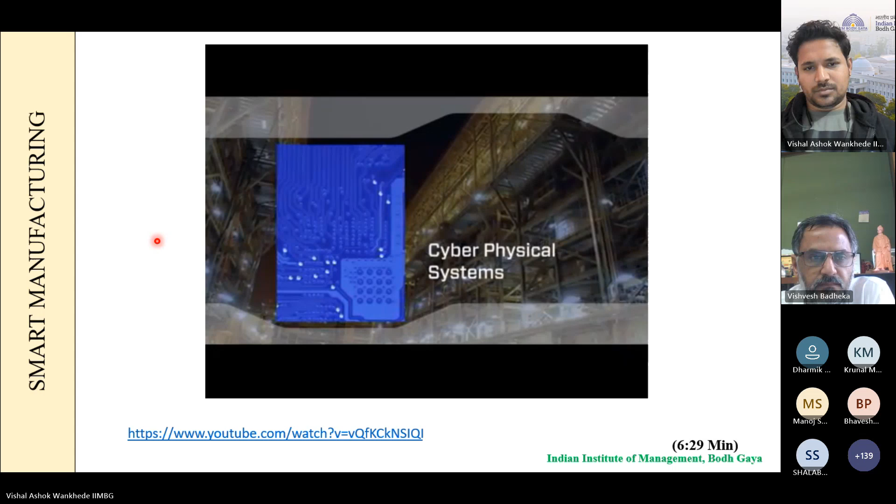Advancements in sensor technologies also play a role by making it possible for manufacturers to create cyber-physical systems. The role of smart manufacturing in collaborative cyber-physical systems is to really bring together people, process, data, and things, and it's enabled by the emerging Internet of Things technologies. Using low-cost sensors, cyber-physical systems monitor and collect data from manufacturing processes. These systems enable the physical world to merge with the virtual world, opening the door to innovative business solutions.

Smart manufacturing allows companies to synthesize information in ways that have never been done before, creating a connected enterprise. Connected enterprise is about bringing together information that exists in a plant floor with information that exists in business systems, and tying that together with the supply chain to optimize your production and the overall supply network. The challenge is each system independently has its own methodology of doing things.

So in a smart manufacturing methodology, we would be able to connect these things together. We would have apps to do these things. We'd be able to solve complicated problems.

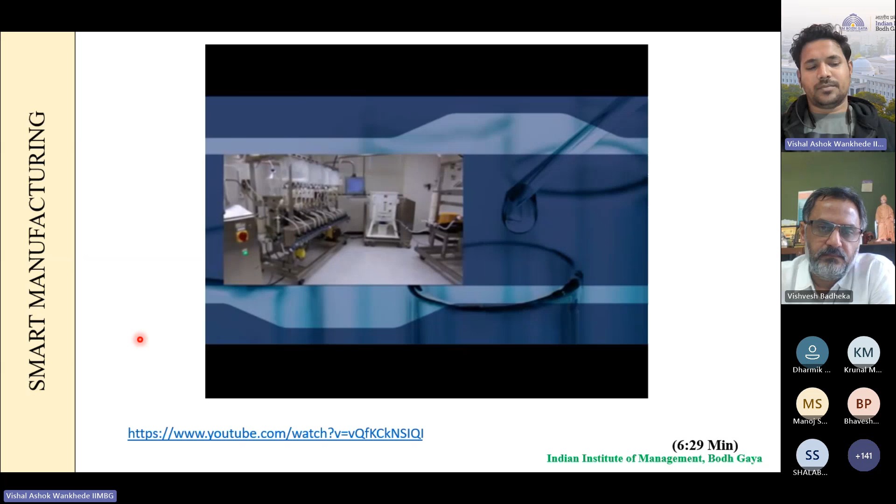Pfizer is using smart manufacturing to develop remotely controlled processes, virtual laboratories, to ensure a consistent supply of products globally. Pfizer has also created portable manufacturing platforms using similar concepts, allowing them to efficiently produce vaccines for children in the countries where they're needed most.

One of our focus areas is develop small scale, modular, flexible versions of our larger manufacturing technologies. An example of that is right behind me. Smart manufacturing is really important to us in developing the control strategies for those manufacturing technologies and also in helping us to effectively deploy them throughout the world.

The Smart Manufacturing Leadership Coalition is helping to do exactly that. SMLC supports public-private partnerships with the sole purpose of raising and advancing a smart manufacturing infrastructure throughout the U.S.

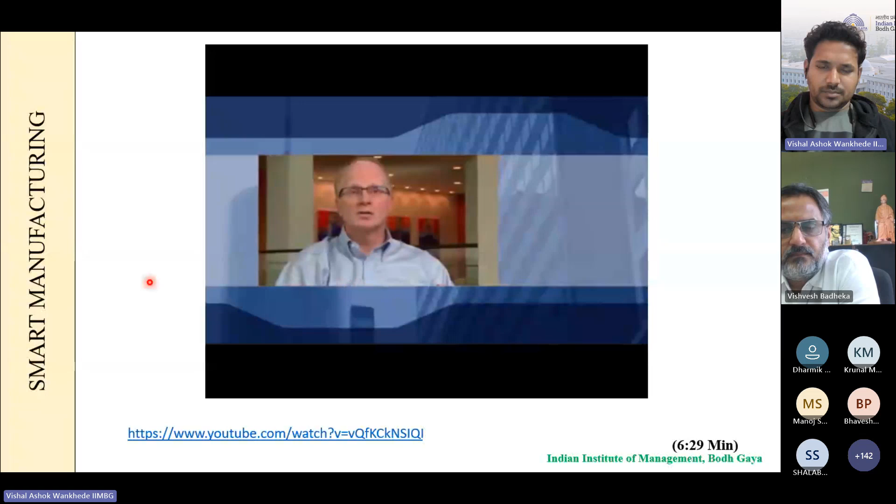At Pfizer, we realize that we can't make smart manufacturing happen on our own. We need investment and support from other pharmaceutical companies and from the academic institutions that help us develop these technologies. And that's what's so exciting about smart manufacturing, is we're bringing together a coalition of people, a coalition of resources to tackle a problem that has been too large for any one vendor, any one company to solve by themselves.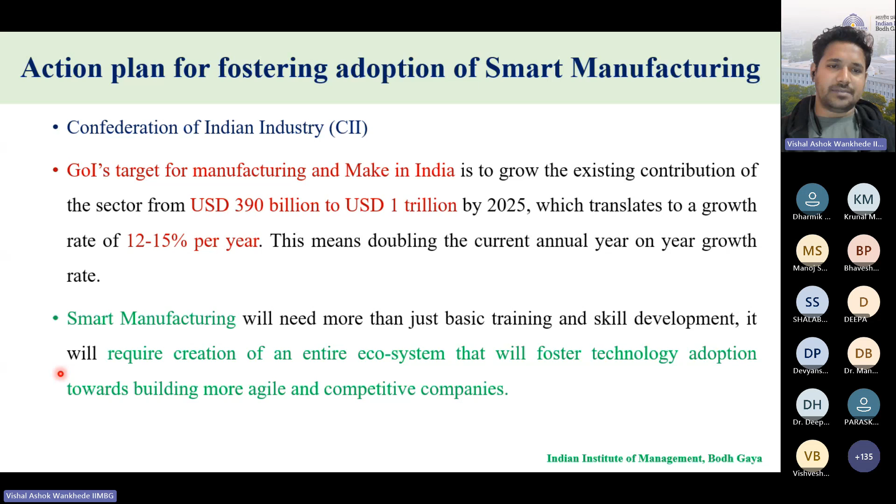With this, what India has done is establish 4 centers of excellence: Kirloskar Center for Learning in Industry 4.0 in Pune, then IIT Delhi, then Industry 4.0 India at IISc Factory in Bangalore, and then Smart Manufacturing at CMTI Bangalore. These are the 4 centers of excellence India has.

What we need to see is basically the perils or the positives. We have reasons for not transitioning to smart manufacturing, but also some positive benefits. The focus here is basically towards the micro level - we have opportunity for mass customization and also opportunities for increased quality, productivity, speed, and security if we go for this. So this is what they have if they're moving towards it, because of the fear of becoming irrelevant - the ones who don't adopt it will become irrelevant in the market. This is what an industry needs to think on.

So the benefits - yes, we already know Industry 4.0 has enough capabilities to work on cost reduction along with production time. Whatever productivity aspects are there in manufacturing, we're talking about time and cost. We can see that Varroc is one industry that experienced approximately 20% improvement in efficiency because of adopting smart manufacturing, and also a 5% decrease in defect rate, that's product defect. Similarly, Bosch also achieved a 30% decrease in production time and cost reduction of 3.6% per annum. So this is what the benefits of smart manufacturing look like at present.

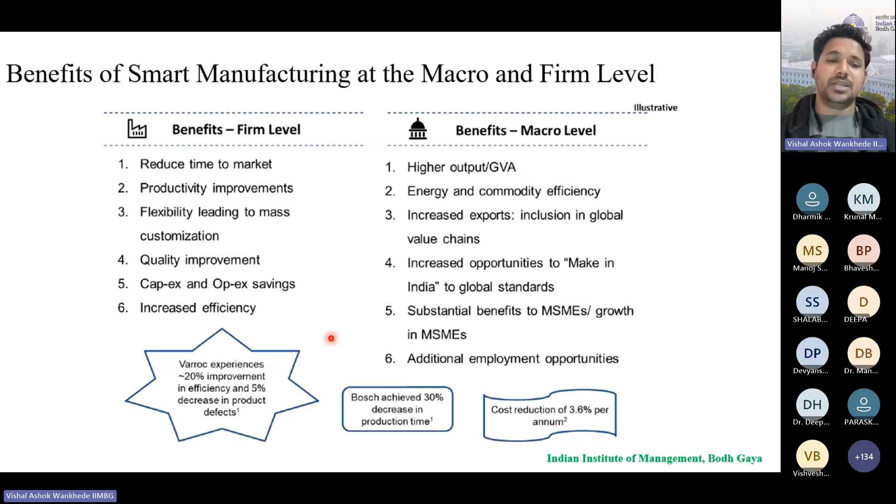What CII did till now, their action plan which they already had. Step one was to identify all the relevant stakeholders who can help in fostering implementation of Industry 4.0. They have already defined smart manufacturing and prioritized the sectors that can promote smart manufacturing. Right now, the critical step yet to be implemented is to develop an Industry 4.0 India platform, and research is still going on to determine the best framework or strategy to create Industry 4.0 in the country.

Similarly, developing an enabling ecosystem for fostering adoption of smart manufacturing is one of the ongoing processes. These recommendations have already been given by CII, but we are yet to implement this. These three steps, however, have already been done.

One of the most important sectors is automotive and healthcare, where smart manufacturing can be realized. Automotive is one sector where 45% of Indian manufacturing is experiencing smart manufacturing, and it is always at the forefront of adopting such technologies when it comes to improvement in productivity.

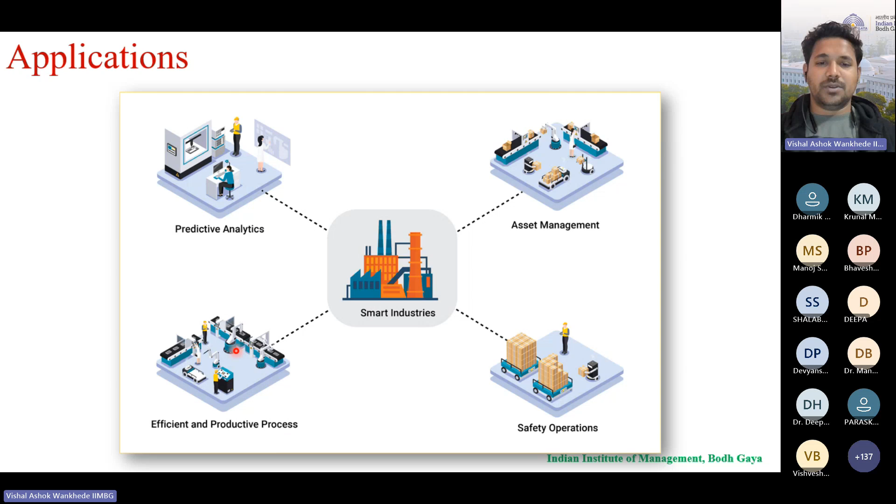Smart manufacturing in general means implementing a technology which can take faster decisions. Coming to the application point of view - predictive analytics, asset management, safety operations, efficient and productive process - these are the common functions that smart industries have.

Similarly, it will help in improving OEE, that is overall equipment effectiveness, where we talk about availability, performance, and quality. These are the three parameters that talk about how to completely utilize the planned production time. If a manufacturing process is supposed to consume an hour, not the entire time gets utilized - some of the time gets wasted. So the available time may be very less, performance may be okay, quality may be okay, but overall equipment effectiveness was not that high. So though you have taken care of quality and performance of your machine, your OEE may still suffer.

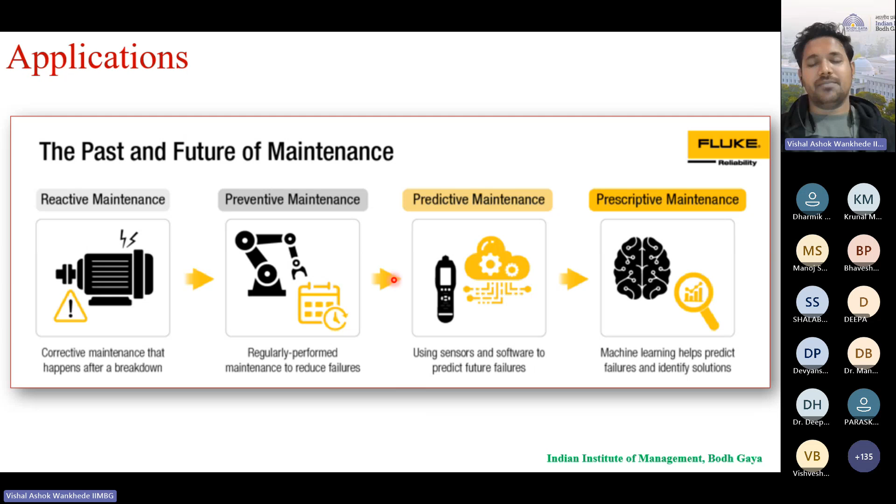So these are some maintenance applications - I have considered only one application, that is the maintenance part. Here we are targeting prescriptive maintenance, where ML helps predict failures and identify the solution itself. We are targeting this, but we are still at the stage where we are trying to predict the failures. Failures are still rectified by humans, but we are trying to achieve lower MTBF and MTTR - higher MTBF, lower MTTR - that's what we are trying to achieve.

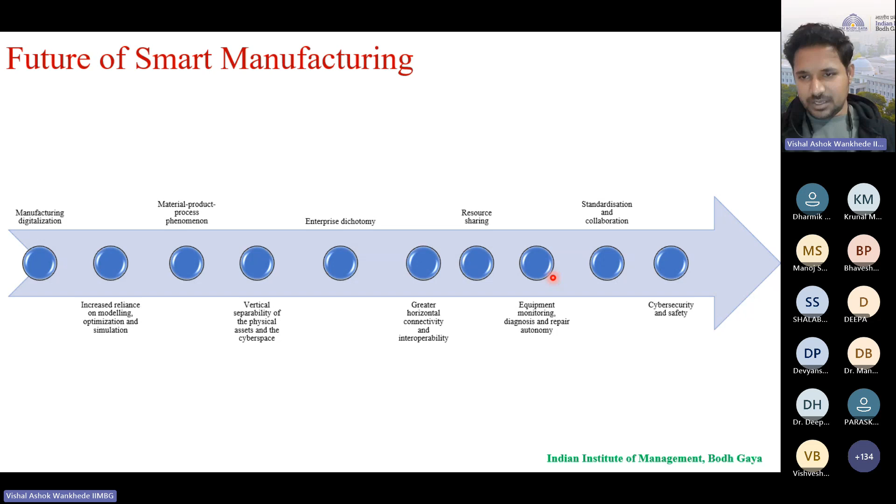Now, the future of smart manufacturing basically needs digitalization, increased reliance on modeling and optimization of material, product, process, enterprise dichotomy, resource sharing, and so on, and cybersecurity and safety. So this is what we have, where we are expecting smartness into manufacturing completely.

Now we'll see one short video again, to explain the practical aspect of Industry 4.0 with a short story. Do you own a manufacturing plant, or do you manage a manufacturing plant?

Do you face some production problems and look for a simple and effective solution for them? Do you want to adapt your plant to Industry 4.0 for less production cost, better quality products, shorter production cycles, more efficiency at every production level? If you do, let's hear Steve's story.

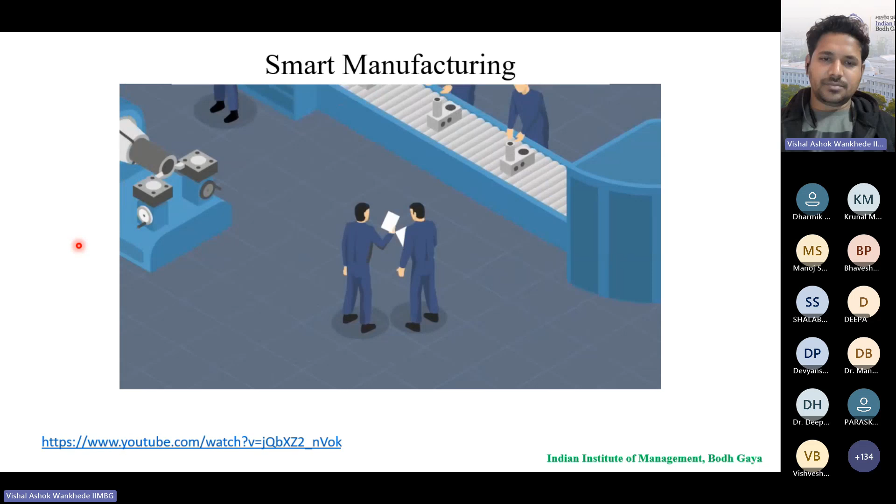He used to manage factory trouble. There were a lot of problems in factory trouble, causing disruptions on the production line, delayed delivery, and therefore causing unnecessary expenses. What kinds of problems were these? Steve could not monitor the production line. Were the machines in production now, or were they in standby? Was the production completed or needed to be in progress? How much time is required for a job order? Steve didn't know these issues exactly and couldn't get accurate data from the documents. There was no notification when a machine stopped working frequently or when a breakdown occurred in production. It took some time until the problem was noticed, so machine and equipment efficiency could not be estimated. Steve couldn't estimate his employees' efficiency. He didn't know whether they worked efficiently during their shifts or they were causing disruptions. He didn't even know if their breaks took longer than they should be. There was no real-time data for stock movements. Sometimes this could result in a total mess.

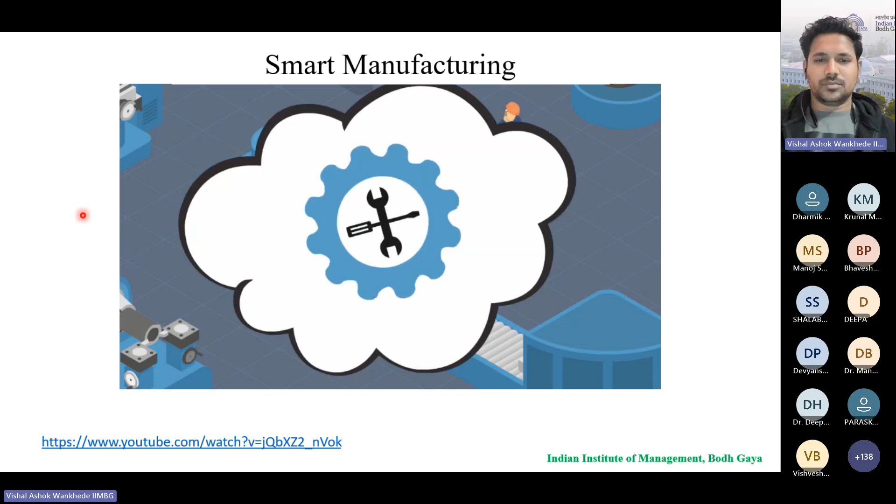One day, Steve met Meta Smart Factory. They presented to him one single, efficient, and the smartest solution to overcome these problems. Steve accepted immediately. Their team set and installed their products on every machine, and installed their application on Steve's computer and Steve's phone. Now Steve can monitor all production flow from his computer. He can plan job orders. He can manage all production processes accurately. He can even follow these using his mobile phone when he's at home or on vacation. When a machine breaks down, Steve and his maintenance team get notified immediately. Following that, the team can respond to the failure by arranging a repair process. Steve knows when the machine starts working.

Now there is no more mess in warehouses. How many products or supplies are there in warehouses? How many of them will be transferred? All stock transfers can be monitored and managed by batch management of Meta applications. Every break of employees is recorded to the system. After a workday, or at the end of the week, or after a month, the efficiency of employees can be analyzed by a request. A report attached to a graph is generated, so Steve can interpret his employees' efficiency. In addition to this report, Steve can analyze his manufacturing workstations, machine status on those workstations, production orders, overall equipment effectiveness, and more.

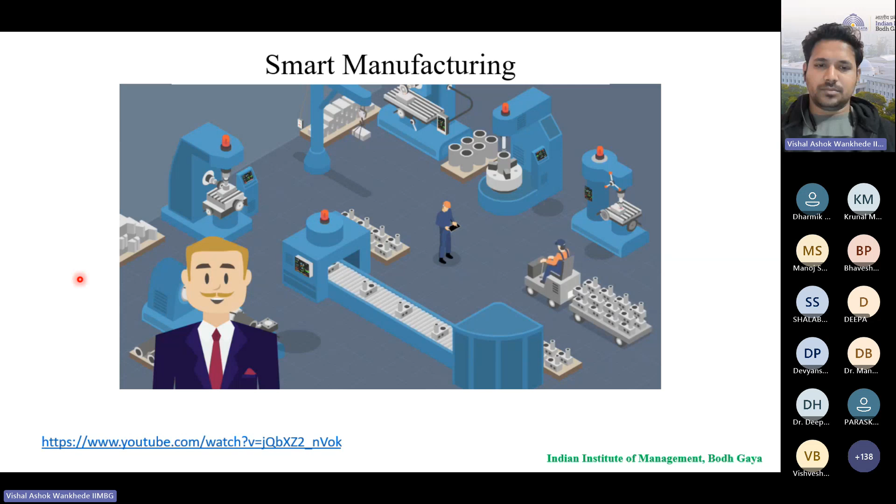In this way, Steve can get a lot of estimations about the delivery costs, and also he can decide maintenance times of machines to increase productivity. Steve solved his production problems with the best solution of Meta Smart Factory. Factory trouble turned into factory ever active. The productivity and profit of Steve's plant increased significantly, and Steve got the edge over his competitors. Well, what is Meta Smart Factory?

So this is what we have seen, the applications of how the industries, third party, is helping industries to adopt Industry 4.0 technologies. But yes, they have to first implement technologies, and then only they can be able to capture this entire data.

So now coming to my last point of discussion, which is research aspect. I'll just talk about where Industry 4.0 is moving now. There's enough research on implementation of Industry 4.0, but right now researchers are moving towards integration of such aspects. So I'll be talking about how this Industry 4.0 is linked with circular economy.

Since we know that linear economy is nothing but your disposal pattern, the linear economy is nothing but you take a product, you use it, and then you dispose it. That's it. The disposal strategy could be your incineration mode; either you'll burn it or you may landfill it.

The circular economy says whenever you have a product, instead of disposing it after using it, you try to reuse it, remanufacture it, refurbish it, recycle it, so that it can be again entered into the manufacturing system, and not use the natural resources, because the product does take materials which are not having much, which are having a good recycling rate percentage.

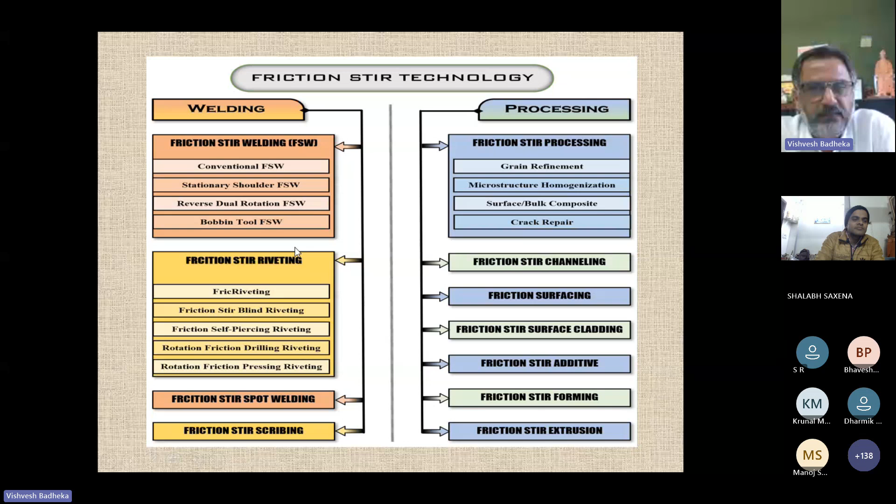We already covered the welding module, with some more information also covered there. So moving further with the friction stir processing.

If you look at friction stir welding and friction stir processing, the fundamental difference is that processing is not a joining process. It is mainly for modifying the microstructure of the material, especially metallic material, to improve its properties with the help of the friction stir processing technique.

Instead of joining two plates with the friction stir welding tool, this time you would be using only a single plate and then run it through the FSW tool. So that is nothing but friction stir processing.

Here you are not joining two metals, dissimilar or similar. You are simply taking a single plate of material and running the FSW tool through it to refine and modify the microstructure, improving the mechanical, metallurgical or tribological properties.